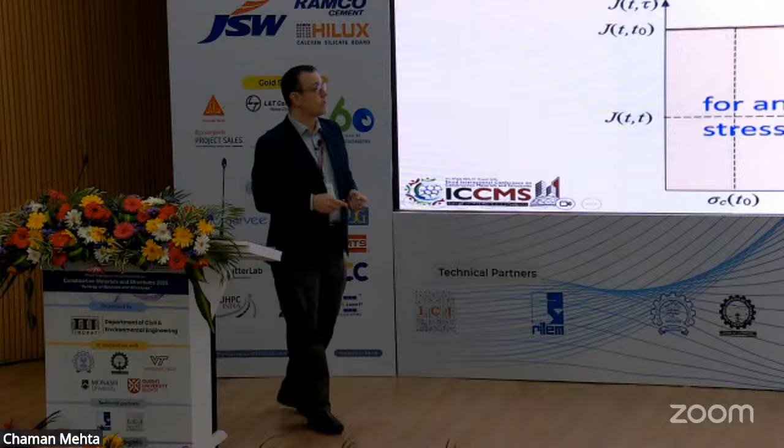So then the question we will ask ourselves is: is this actually the right way to do it? Is this the right approach we should use all the time? I'm not here to say it's not, because a simplified good model is always wonderful. But there are some scenarios I'm going to talk through in a second. I would say it becomes important to push serviceability further in those scenarios where serviceability criteria are actually those governing the geometry of the members.

There is a lot happening at the moment in this space, especially with new concretes, and also when environmental conditions play a role. I just thought to highlight this IABSE publication. We're focusing on the time-dependent behavior of composite structures. The idea here was really to bring it from materials to applications. We've got some case studies on real bridges and real building applications.

And one issue which I would like to flag, going back to what we were saying earlier, was that we had a lot of problems, for example, in getting the calculations for the building, the calculations on the serviceability, not because the companies were concerned about sharing technical information, but because the developers, so we're talking about who was driving the investment, didn't want to have any numbers on the market, in the public domain, because they were scared it would affect the real estate value. So there is actually a chain which goes beyond the technical justifications. And of course, there are legal implications if you start to write out results and measurements.

So now, going back, I'm going to try to skim through a few scenarios. I'm going to try to be as fluent as possible. I hope you will enjoy. Personally, I love this test. For me it's a pleasure, but not everybody, I would say, shares the same fun for some tests.

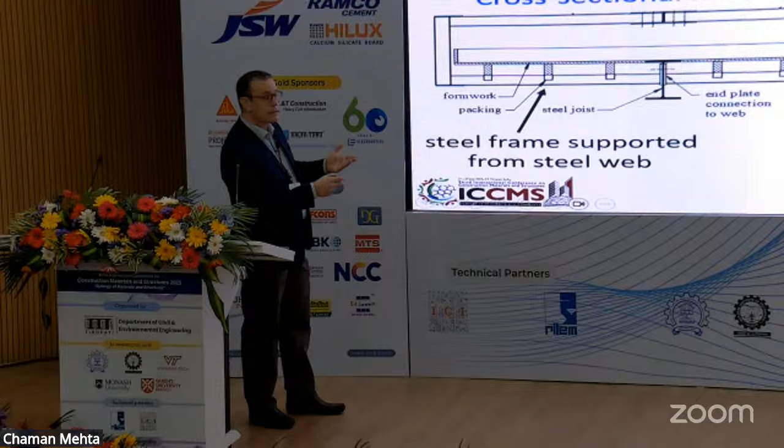So in this case, for example, we set up this simple frame system to create a scenario where we cast and prop. This frame is attached to the web. We put the formwork on top of it, we cast it, and then we remove the props. We did simple things, I would say it's common sense. Sometimes good structural engineering is about common sense. To load and unload them, we just release some shims, and it worked perfectly well.

Another thing that we did, because I think it's needed when you start to do setups, is that you need a constant load when you want to look at creep, for example. Usually, if you've done tests on creep rigs, you know that the typical creep rig has a pump. You have to go there every so often, especially every 6 hours, 12 hours even. And the idea was, do we need to do that? Can we switch it to something that is actually person-free? Why do you have to have someone always slave to the test?

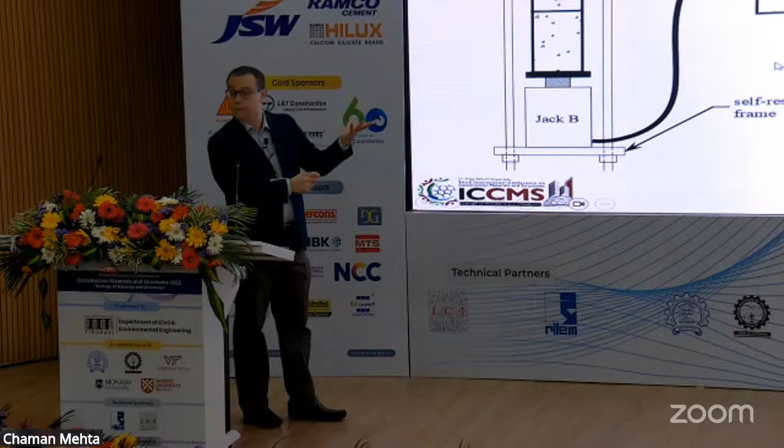And so we spent some time. I would say for me this was one of the hardest test rigs I've done, because we spent a lot of time changing the jacks. Basically, we put a sustained load, like a self-weight piece of steel or piece of concrete, against a smaller jack, a small ram, which builds up a pressure, and then apply the pressure through a larger jack, so they can keep it loaded. We tried different sleeves, and then we got to a system where once you push up the weight, it stays on for 3-4 months. So it's brilliant, it's very comfortable. And we applied that to different scenarios.

In this case, for example, it was the test rig that we did for push-out tests in the long term. I just want to show you that when you do advanced modeling, you have to push the experimental part as well, because otherwise it becomes a numerical exercise. And this is the interesting point, in the sense that these results are already post-processed. So in this case, you've got the 3 beams we saw before. In this beam, we got only the shrinkage effect. In these 2 cases, we got only the creep effect. So it's been already manipulated.

What I want to highlight here is that the continuous line is assuming a linear elastic shear connection. So it's just a spring, the interface between concrete and steel. And the dashed line is time dependent. So we got a sort of creeping of the shear connection, which has to do with the 3-dimensional behavior of the concrete near the shear connector. As you can see, shrinkage and creep have opposite effects. So without trying to visualize more with a more refined model, you will never be able to distinguish that creep is overestimating, going above the elastic response, and when you look at shrinkage, it's going below. Because usually you look at the results always together.

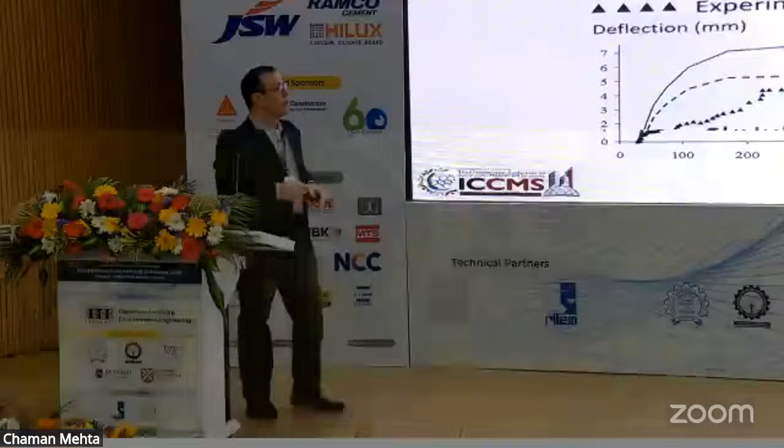In this sense, we were able to develop the equation. And I would say you will not be able to get this kind of insight without doing the suitable tests and having the models suitable for that. This will apply to any connection; nowadays you see a lot of buildings having very fancy connections where the shear connection is really working. Once you have the loading system set up, you can really do many, many things. Then I would just like to move on to some models.

So we actually pushed line elements mostly. And the reason is that sometimes to set up these three-dimensional shell and solid elements is quite complicated. It's very hard to check and it's very hard to post-process them. So we actually spent a lot of time and fun, I would say, in developing line elements. And we really played a lot.

And we look at, for example, cases where you have composite beams with shear connection, or even allow deformability like you will have in thin-walled structures. And this is, for example, some work that we did from generalized beam theory. It is originally from Germany in terms of the origin of this theory, but it actually became very powerful.

Just to show you the effect of it, if you have a box girder like this, and you just model it linear elastically, just to give an idea, you can see you can capture it. These are comparison displacements between the line element that we produce and a very refined Abaqus shell element model. You see, actually, they perfectly match. Of course, the deformations are exaggerated here just to show them, and the same thing applies to stresses. So there is a lot of power that we have available, and we really need to use it in the right context, I would say.

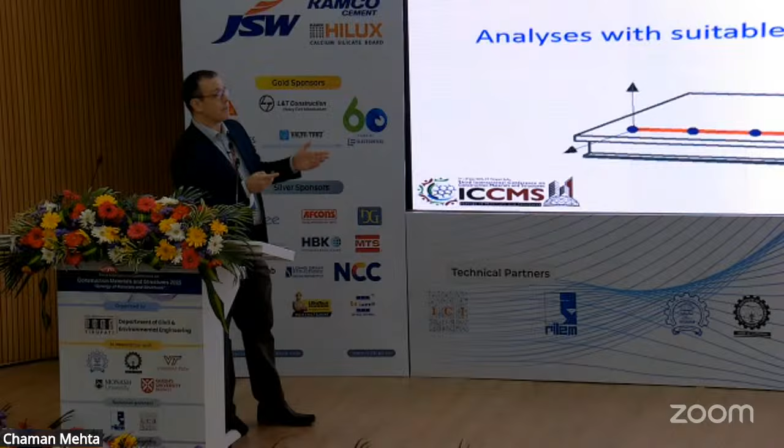So this is, for example, to look at shear lag effects. Shear lag is basically the behavior you have in a typical flanged beam, but it can be a wall or other systems, where you have higher stress concentrations near the shear connections, or where you have loading coming through thin elements. And usually in design, we just use effective width. If you want to create elements for very good, very quick design check calculations, you can start to refine your models to account for the shear deformability of the slabs, or combine them with whatever deformability you want to pick up also in the steel elements.

And you can then, for example, with bridges like these, run very simple checks by just using line elements as a user. Now, these line elements, of course, are not just the typical line elements, they're enriched. But from a user's point of view, it's very easy to implement. In this case, we're matching, comparing, the shell element model and the line elements, and you see the results match very well. I don't want to spend time showing you every single graph, it's really the concept here that I'm trying to get across.

In this case, before was displacement, these are stresses. Stresses especially are quite hard to get. And again, you have a variation here of stresses in different locations, so in different stages of the deck. Again, when you have complex geometry, we can also set up models to manage that. And again, following the same process, you can really capture those behaviors.

Now, this becomes important because, for example, I had a conversation with design engineers who do design checks of bridges. And it is not always very clear what the implication of deformations on the bridge is, for example, when they're doing the final checks, they put, say, some trucks or heavy loads on the bridge. Sometimes they misinterpret the deformation because, for example, they ignore shear deformation. It's actually quite important in these bridges, and these models capture it very well. So they're very useful models.

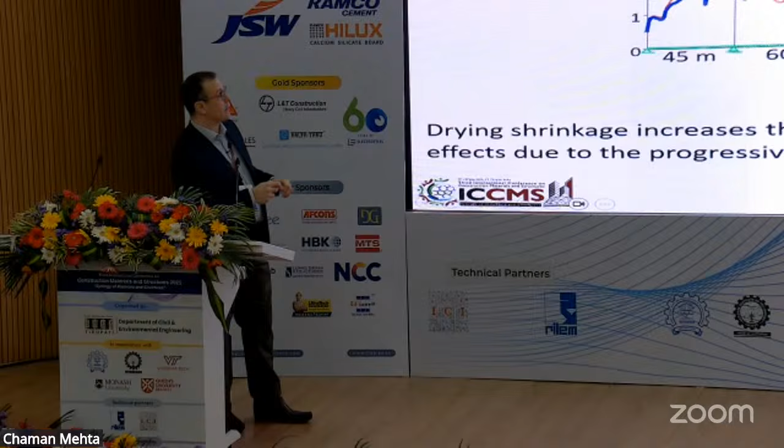And if you now look at, for example, the first week after casting or after 5 years, in this case we didn't include cracking, in the sense that what we are comparing, at least for this particular study, is really to have a sense of the implication from a design point of view. Once you start to introduce cracking, you have to be very careful how you manage the hypothesis. It can be done.

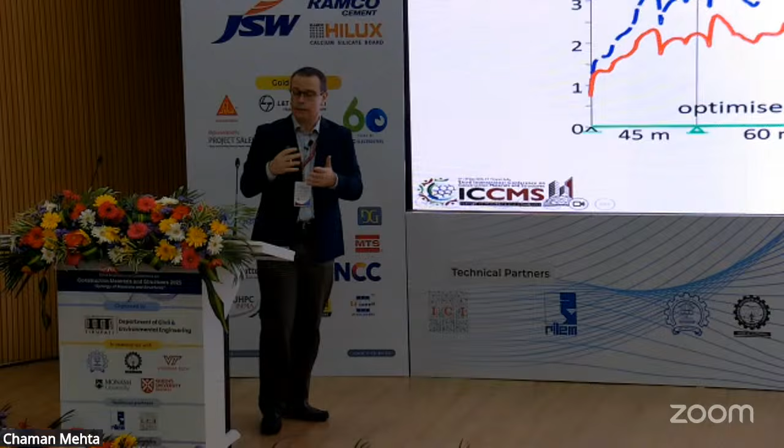It's not an issue. And this is, for example, the other issue in relation to the tensile creep behavior. If you increase the value for tensile creep, the stress in the concrete in tension will release quicker, and therefore you will actually have even less stress. So this is just to say it's worth using this, because what are the main advantages here?

The main advantages, and this is now for the bridge you saw before, is that you're pushing the peak stresses on the concrete near the second moment regions, which is fine from a modeling point of view. And you're getting away from the stresses you would have in the bridge. So these are plots without traffic loads. These are just really looking at the shrinkage effects.

And again, you can see at the supports you have a big difference. If you look here, the red is the continuous cast, and the support is really where the issue is. At the midspan there is a small difference, but keep in mind there is a lot of variability also in the concrete properties.

So the idea is, if you want to push down this path, I would say there is a lack of space in the software domain, in the sense that software houses are not always very keen to push these kinds of models, also because they're very hard for them to post-process, to manage, to maintain.

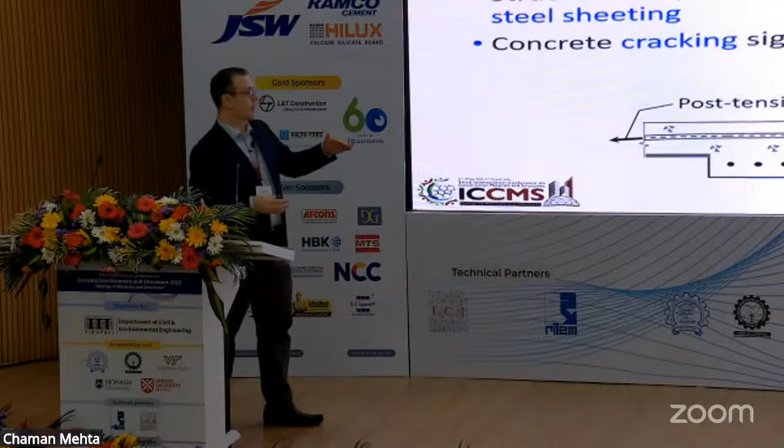Now, I would like to move to another scenario, and this is a very common floor system in Australia. If you've been to Australia, any car park is always a post-tension floor. Most tall buildings in a city like Sydney have post-tension floors, composite floors. And in the last 10 to 15 years there has been a trend to replace timber formwork with steel sheeting and just leave it there, to speed up construction.

And we've been involved in a project where we've been asked by a number of companies to look at this and say, can we take advantage of the composite steel sheeting? When we start a project like this, we usually start with some tests that demonstrate to us what is happening. So we had a lot of samples of this type where we tested simply supported post-tension slabs, and we did some unreinforced concrete measurements to measure the shrinkage behavior.

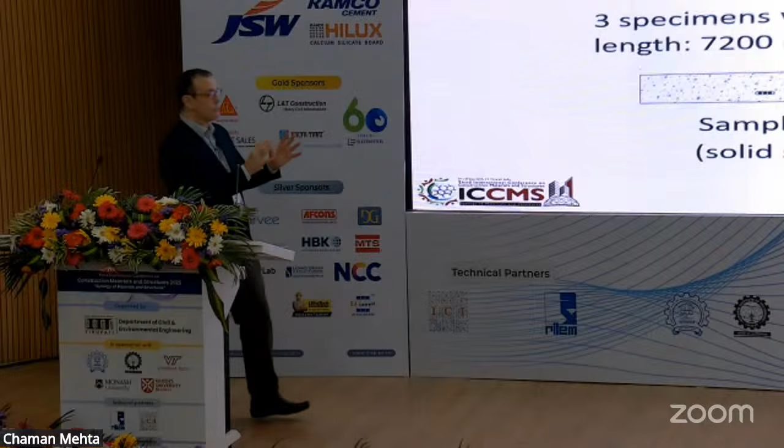So I'm just going to show you some selected test results to make you see through the issue. Let's say you've got a simply supported slab. Simply supported is a gift of a test, because it doesn't have the complexity of the continuity that you have in reality, but at least you can isolate things. And we had 3 identical samples. The only difference was we put the sheeting on 2 samples.

As always, I like to show samples before casting, because there is a lot of work in the preparation of the samples, and we never actually share it. Once you cast it, it disappears. In terms of details, we resembled the true detail of the steel deck on site. We stopped the sheeting before the support so that there was no friction between the sheeting and the concrete. And this is the information for the setup.

So these are usually the aspect which is interesting: at least the trend is to really apply the pre-stressing 25% in the first day or first couple of days, and then the remaining 75% after a few days. Now, if I can ask you to look at these results here. Here you've got the 3 samples, the 3 sections before. So you've got 3 samples, simply supported. These are the results for the concrete one, the first one, which is exposed top and bottom.

Now, can I just ask you, if you imagine you've got these other 2 samples here, if I have to plot them on top of this curve, how far would you measure them from here? And these are the results. So you see, here is the solid slab at the bottom, and here are the composite slabs. Keep in mind, the only difference is the sheeting. And here we are talking about 20 millimeter deflection already after a few months, 7 months.

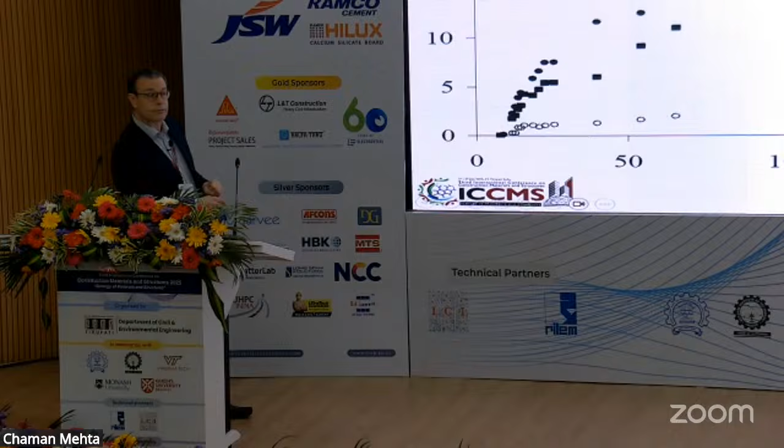What we did here, we also isolated and tried to predict these behaviors by putting different surface conditions on the unreinforced concrete samples, keeping them there over time. It has to do with actual drying conditions, when you dry from the top and bottom, or if you dry from just one side. If you dry from top and bottom, you have a shrinkage profile of this kind. In reality, you can approximate it for design purposes as a linear, constant deformation, which reflects the total deformations you will have in a sample if you look at the monitoring.

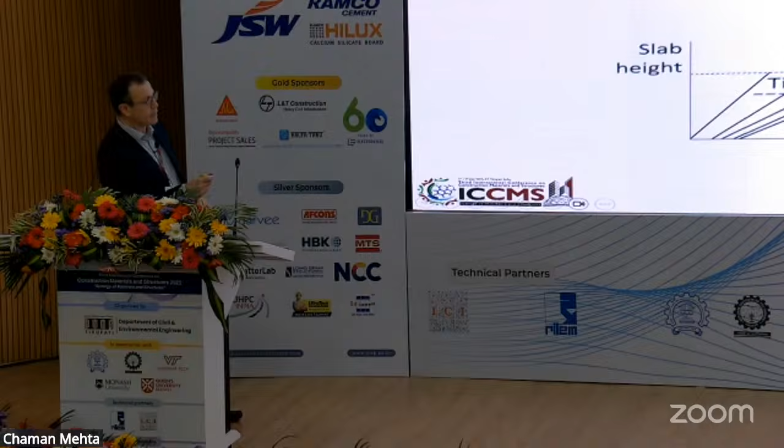And when you have the sheeting at the bottom, so it's sealed, when you do this test you just put some plastic to seal it. You create this kind of different gradient, which is the cause of that additional deflection that you saw before. So in reality, we confirm that what you do in reinforced concrete design is fine, but when you go into composite slabs, you need to move really to a shrinkage gradient.

We also applied some other samples where, in one particular one, we put curing compound, which is a sort of liquid that you put on top of the slab to stop it evaporating. You can see here some plots of the test setups, some during preparation. You can see the curing compound on the top will actually reduce the deflection, so it's sort of helping. But again, curing compounds, if you look at the data sheets, are really only viable for a maximum of a month or a couple of months, so you wouldn't want to specify this in design. Also how you apply them is very variable, so it's not something you can really specify from a structural viewpoint. But it has an effect.

Again, in this case, if you apply the uniform shrinkage that you would usually do if you were not thinking of the shrinkage gradient, you will be completely underestimating the deflection. You will be quite a long way out. And you saw in the test before, we just had the solid slab. As a final remark on this domain, if you look now at composite slabs, simply supported and continuous, we have the same profile. All we change now is the drying condition, the surface condition on the top.

I'm going to show you the results now for one sample, which is a composite slab with the steel sheeting at the bottom, sealed on the sides, and another sample sealed everywhere on the top. So if you look at these results here, we're looking at this simply supported beam, 3-meter span, which is typical for this kind of dimensions. If you sealed it at the end of the day of casting, this is where you go. Why do we do that? Because we want to eliminate all the drying effect. You can really kill time effects a lot if you limit your drying effects. If you keep it exposed on the top, you build up all this deflection here, and again, it's due to the gradient you saw before.

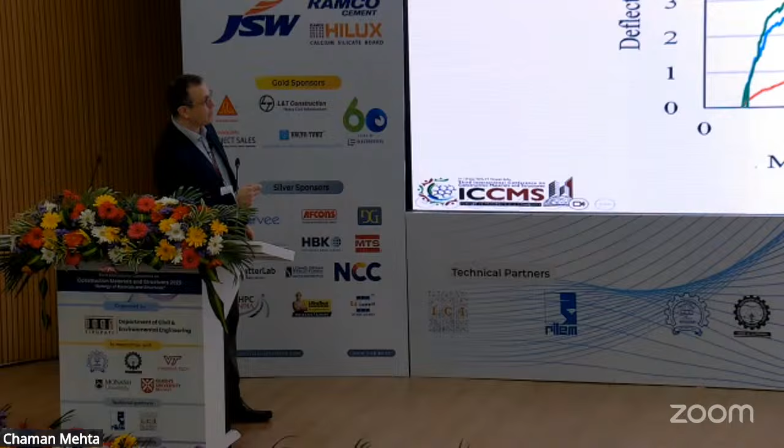This sample here that stopped here, we actually kept it exposed up to 37 days, and then we seal it, representing what you will have really in a construction site where you have your casting, and then eventually you go do your furbishing of the building. So can I ask you again to imagine, what would you expect? You got it exposed up to here, and after this point here, you seal it. So after this point on, it's sealed.

So where do you go? Will you go higher here? Where would you expect it to go? It actually reduced the deflection. So it's something which was actually quite interesting.

And I'm not going to go through the details here, but this is related to the humidity profile through the concrete thickness. It's a very difficult measurement to do, I would say, humidity measurement. So it's an approximated one. But what we could see here is that once you seal it, it will change the humidity profile, which is what drives time effects. And that was the reason why it was coming down.

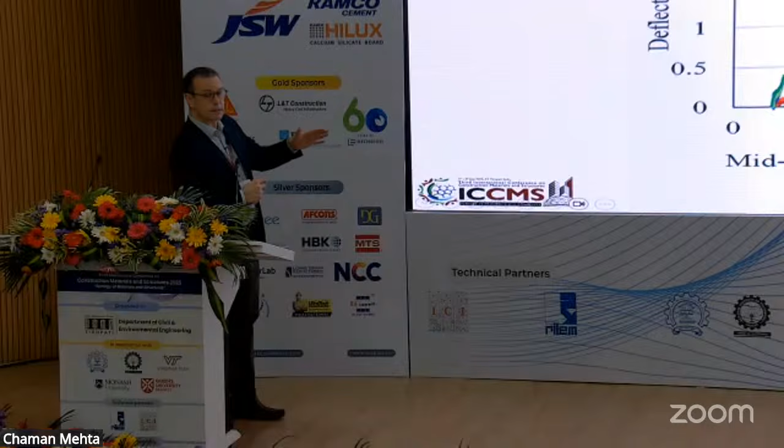We had a similar thing with the continuous samples. And again, these are sealed, the red ones. You got two lines because we got two spans now, it's continuous. In this case, you got the two spans, red sealed, green exposed on the top for the entire period. And the blue one is because you seal it after 37 days. The difference is due to cracking already occurred a little bit, and therefore the two spans are moving in slightly different ways.

So I think then the question is, we got these behaviors here, how do you account for them in design? We got them already incorporated in the Australian composite code. And my suggestion will be, push it to more advanced analysis. I think this is really the way to go to push future designs, not just from a serviceability point of view for time effects, but also for durability, because the features you need to calibrate for the time effects are also those driving the durability issues.

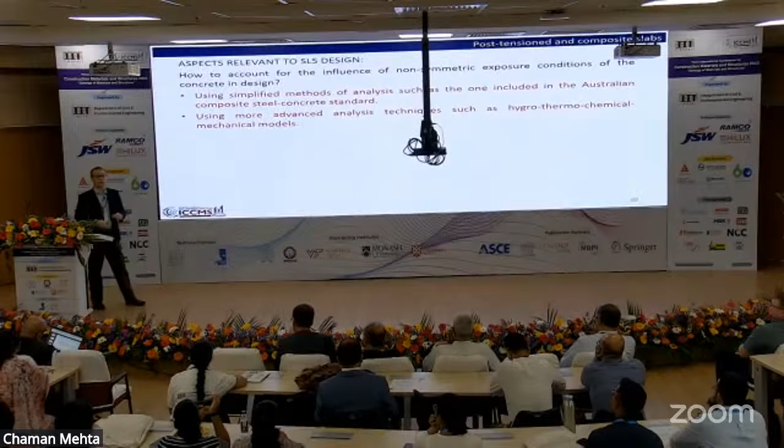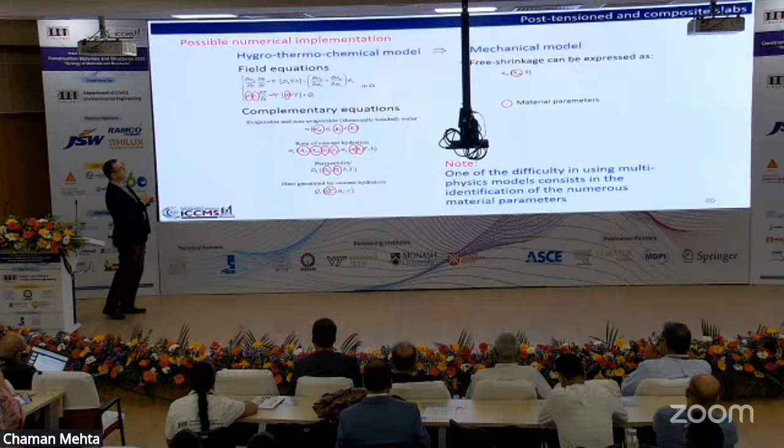And this is when you want to push it, say, for example, here in more complicated models, I call them multi-physics models. What I've done here is one way to approach this. It's quite a simple model out of those that you can develop in this space. And what is the issue here? The issue is that I circled all the parameters you need to identify, material parameters. So the idea here is that we've done some work where we're trying to optimize the tests that you need to do in order to identify the parameters.

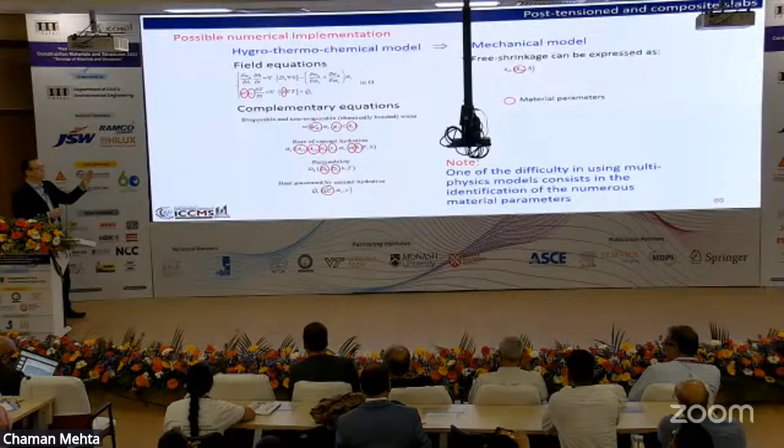Because when you got so many parameters, you actually have different sets of parameters that will give you the right solution, or the solution you measure. So I would say the challenge is really there. And it's just to show you how, with this sort of multi-physics model, we were able to identify the parameters just for the concrete mix, and then we're able to capture quite well the response. So I would say this is where I would love future trends in our standards to go, to move over to multi-physics heavily. And again, similar trend. And these are not numbers that we fudge. That's what's beautiful. They're parameters we identify through a particular process.

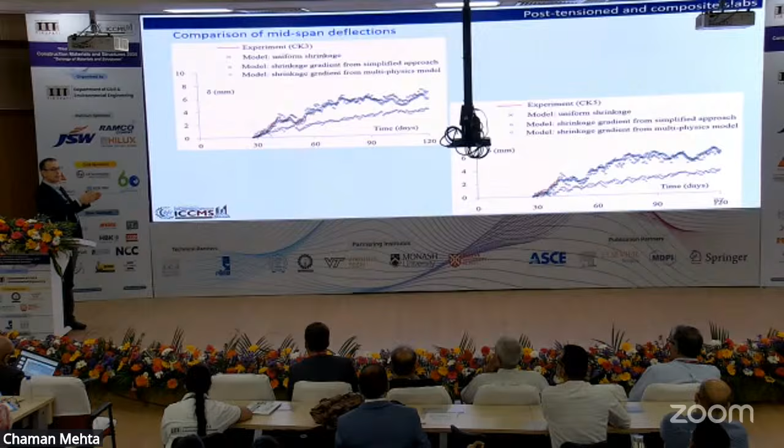Now, just a final remark, so we close very quickly: what is worth going to advanced modeling for? Well, you can do it for fun, but I don't think it's very useful if you're talking to industry. I would say when serviceability state is governing the design, that's fantastic. And also when you want to extend the design life of a structure. There are a lot of examples now where buildings have been maybe only partly demolished and then retrofitted and extended for another 50, 100 years. Now the design life is 100 years. So it's quite useful in this space.

I think one thing in engineering, which we were talking about earlier with Professor Novak, is that we need to have more information also on the buildings, how they behave.

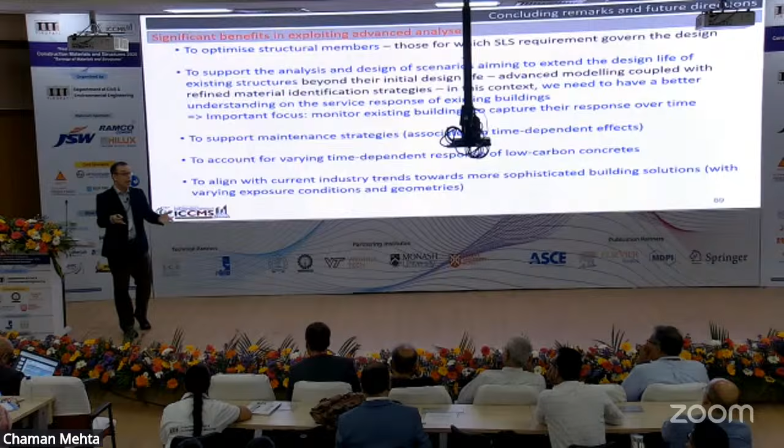I mean, we are quite different from the industry where, if you buy a car, you buy because it's beautiful, and also because of the technical specs of the car. In buildings, usually you tend to only go for the view. You tend to go for, where is it? How big is it? How it can show off. You don't actually go with the specs of the building. That's where I think we have to educate also the customers, as you will have in a cuisine, in a restaurant. It's that level, I think, of evolution that we really need to expand.

And of course, if you push these kinds of models, you can use them for maintenance because now you get time effects, but also durability. And I think low carbon concrete has a lot of issues with time effects. So actually, these models will allow you to really push them, because variation in temperature and humidity have a big effect. And I would say there is also a trend in industry where they're going into very, very fancy solutions. So I would like to recognize that a lot of funding came from the Australian Research Council and also colleagues, who have been funding us to play through these models.

Thank you very much for your time. So thank you very much, Gianluca, for your huge presentation, a lot of information, a lot of content. We have around 5 minutes for questions. Please.

Good morning. I am Theta Rasmi from IIT Madras. Your work discusses approximation for the aging viscoelastic behavior. How is it sensitive to different creep parameters and the shrinkage strain parameter? Because in the numerical approximation, they assume the time derivative of stress is neglected or is assumed to be constant within a discrete time interval. But in reality, concrete follows the ACI or FIB code provisions. They don't follow the Prony series model. So how is this method sensitive when we deal with that?

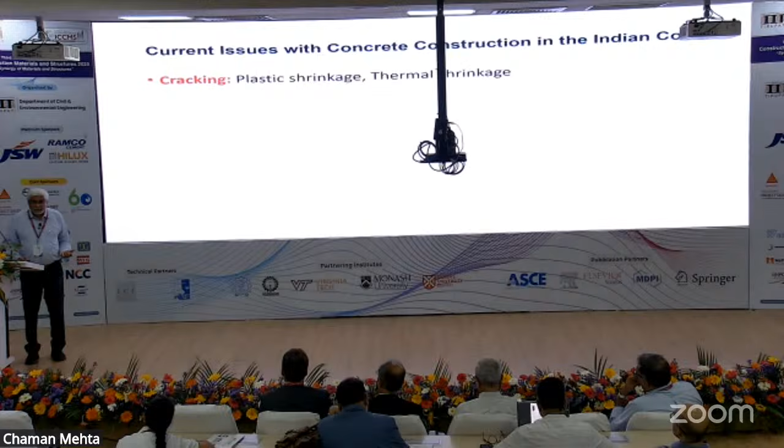Having said that, there are a lot of issues related to materials, related to new technologies that I'd like to touch upon. Cracking is a big problem. Everyone you talk to at sites would say that cracking is always occurring. It could be because of plastic shrinkage, thermal shrinkage, which often we don't know how to handle from the structural design point of view, or sometimes even from the construction point of view. Testing, where to test. Some people say, who is going to test, the RMC plant or the site? And sometimes it falls between cracks. What age we should test, what frequency. Durability is and will be a big problem.

We have corrosion happening. You will hear from my colleague Radhakrishna Pillai tomorrow. Leakages everywhere. There are buildings where having a bucket is very, very common in your office or bedroom because you don't know how to take care of the leakage.

Then sustainability is something that we have to take care of. We are building like mad. We are using up raw material like crazy. And we are making mountains into ditches because we are taking away all the aggregates. So carbon footprint, raw material consumption is very, very important. And a big problem for a country like ours is water.

See, when we teach about concrete, all of you who have studied concrete will remember that we say good quality water should be used for concrete, potable water should be used for concrete. But this is the water that you're taking away from people. So this is the paradox. People need houses, need bridges, but they need drinking water. Now, who has to sacrifice the water? Places like India are suffering, other parts of the world also.

We're running out of water. There are disputes going to be there for water. Wars may be fought for water. But we are insisting that good quality water should be used in concrete. We should start looking for alternatives, and we are looking at treated sewage water. Let us mine sewage water for concrete. Let us not use drinking water. Let us think of how we can extract water that is not drinkable and use it for concrete.

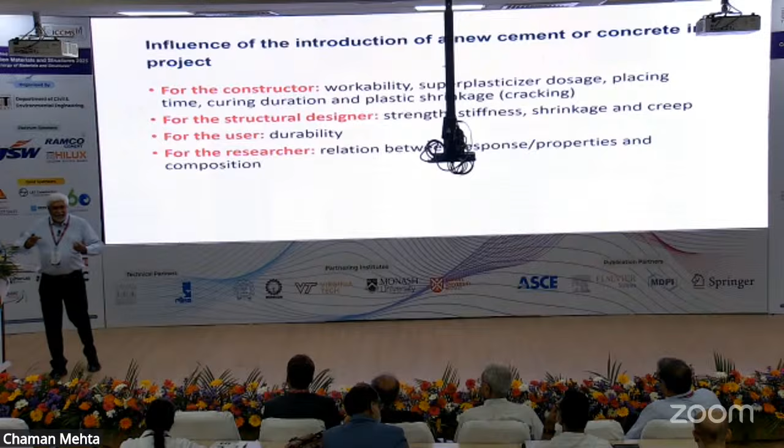But for the user, does the user care whether you use the right amount of steel or you use M40 concrete or M30 concrete or not? The structure has to be durable for the user. I am living in some place, I want it to last as long as I want. Now the researcher comes in and has to do something. We have to make a living. So you try to connect all these things and come up with formulas and a lot of power equations and all that stuff to get this done.

For the administration, suppose they want a new city or a bridge, they want service life. This depends on many of these other things from the beginning. You construct badly, you don't cure well, and your life suffers. So these are different things, and obviously the planet suffers if you don't do a good job. Your carbon footprint is gone. So what is unique about concrete, which is not there for any other material, is you have multiple stakeholders and anyone can stop you from implementing a new material, or be it structural or whatever.

So this is the big challenge, and we have to try to understand all this. At IIT Madras, when we take a new material, like this new type of cement called LC3, which we've worked on for about 10, 12 years, it has now recently been standardized. We will see it in the market soon.

So we said we'll have to look at all these aspects. Otherwise, just doing a bit doesn't mean that you're going to help this concrete be implemented. Okay? We have to make sure that the contractor, the constructor, is comfortable with this concrete, not scared off because the superplasticizer demand goes up and plastic shrinkage happens, then they will just refuse to use such a concrete. The structural engineer needs also parameters and so on. So all these things are important.

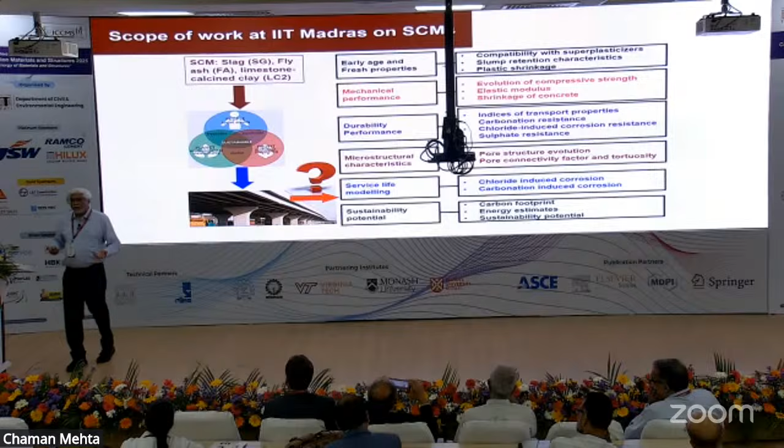And also what we realize when we implement new technology is that all of it is not wonderful. But researchers will only talk about wonderful things, because you cannot write a paper saying that all these things are wrong with my technology. All the things I've done wrong are never seen in a paper. You always say wonderful things. Now, we know that fly ash concrete or any concrete which has very little clinker is good for chlorides, bad for carbonation. We play it down. We say that carbonation will hardly occur. But we have to talk about these things. We have to understand the pros and cons, or somebody else will find out the con and say that this is a bad technology. So this is very, very important that we do everything needed to take something into practice.

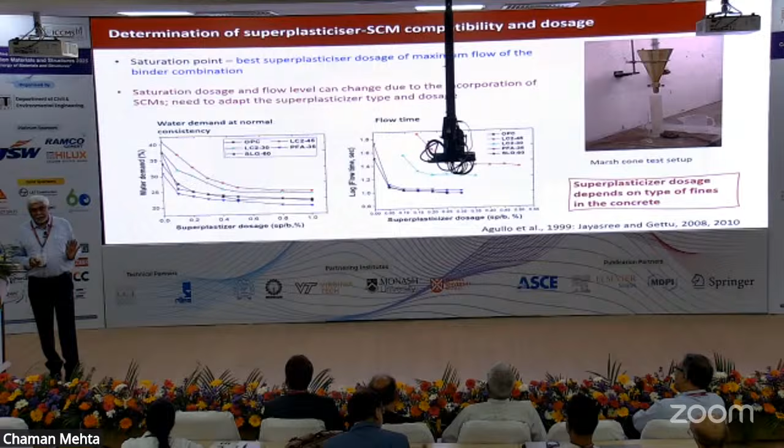Now, adding on to what Gianluca said about the 2 types of shrinkage, I'm going to give you 3 more, because we start a little bit earlier. Plastic shrinkage is very fresh concrete cracking. This in India is tremendous. We have huge problems. People will go for lunch and come back and the concrete is cracked. And who will they blame? The cement or the RMC? They forgot that they have to cure.

When is curing usually done? After 24 hours. And if you cast concrete on Saturday, when do you cure? Monday. Concrete doesn't know this. Concrete doesn't know that Sunday is a holiday. It happily cracks. In reality, you go to sites, large slabs are cracking, and then people say, you made us use fly ash. Yes, fly ash will crack, but you have to cure earlier. So I tell people, simple thing, push your thumb into the concrete. If it doesn't go in, start curing. No need for any sophisticated maturity meter. Just use your thumb, and it works.

Plastic shrinkage, autogenous shrinkage, Gianluca very nicely showed that this is going to become more and more important when you have higher grades of concrete. Similarly, thermal contraction. Diaphragm walls, very systematically, most diaphragm walls have a crack every 2.5, 3 meters. Professor Prasad, they come to him and say, cracking. He says, did you cure it? And they say, we will start doing it. So the first 3, we never studied about. When I was a student, we never studied about the first 3, because you had so much water in your concrete, it did not crack due to the first 3. Drying shrinkage was important. Now you're putting so little water, you're putting 0.3 water cement ratio, 0.25 water cement ratio. The first 3 are becoming important. Drying shrinkage and carbonation, maybe not.

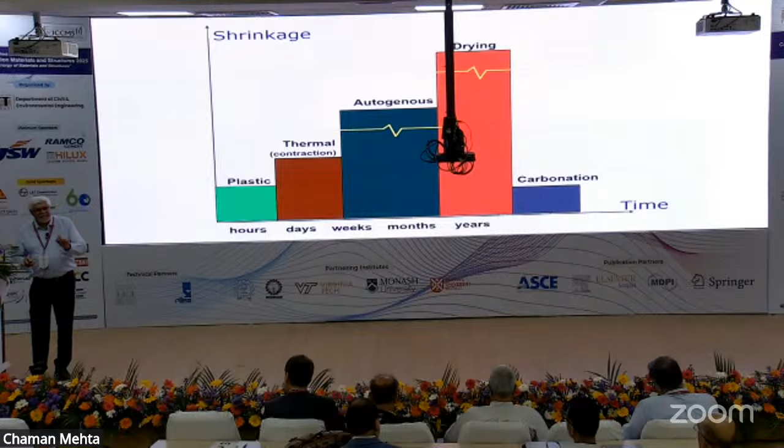One easy way that I tell students or even consultants to remember: when you see a crack, the first question you should ask is, when did you see the crack? There you get half your consultancy fee. If somebody says there's a crack, just ask when it happened. And most of the time, this resolves the issue. So this is very, very important, very simple. And if we can take care of this, a lot of problems will be resolved.

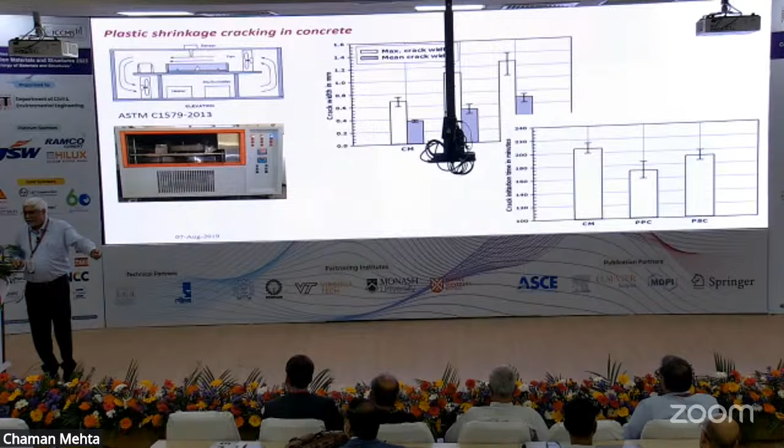Cracks are starting earlier. That means you have to cure fly ash concrete, slag concrete, LC3 concrete earlier and cure for longer. This is very, very important. We cannot relax and say that, okay, the concrete is taking care of itself. It will crack. Look at the numbers on your right, and you can see the increase in crack area. So we actually measured how much the crack area changes under these circumstances.

The fly ash content is 15-30%, GGBS is 15-30%. Crack increases a lot. The strength is the same, workability is the same. From the structural engineering point of view, it is the same concrete. But the material has changed and now it's going to crack. And this crack will stay forever in the structure.

Now, what do we do about it? I'm not saying throw away fly ash and GGBS. Simple thing: put 1 kilogram of polypropylene fibers into your concrete. Most of this cracking is resolved. Very simple cure, very little cost, very little effort. Nothing else changes. Can be done. So these are things we have to understand. And if you understand that, new technology can go in easier.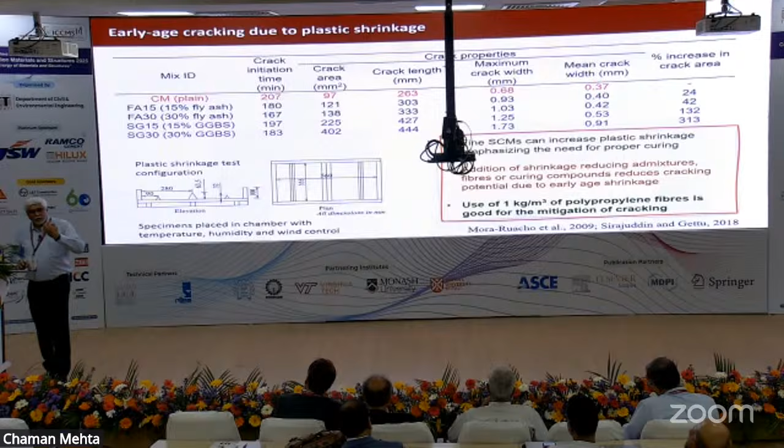3D printing is prone to severe plastic shrinkage cracking because you don't have aggregates. You have thin elements, very high surface area, very high cement content. On a hot day, a little bit of evaporation is going to give you a lot of cracking. Otherwise, the project is wonderful. But you can have cracks.

So what we finally have to do is maybe in 3D printing, just behind your nozzle, there has to be a mist sprayer. Just like your nozzle is moving, there has to be a spray just behind, which will keep the concrete wet. Otherwise, amazing technology will be thrown away. Your user will say, it's all cracked. I don't want a building like this. I don't want to live in a house like this, an office like this. But simple things can change, and we have to understand what happens.

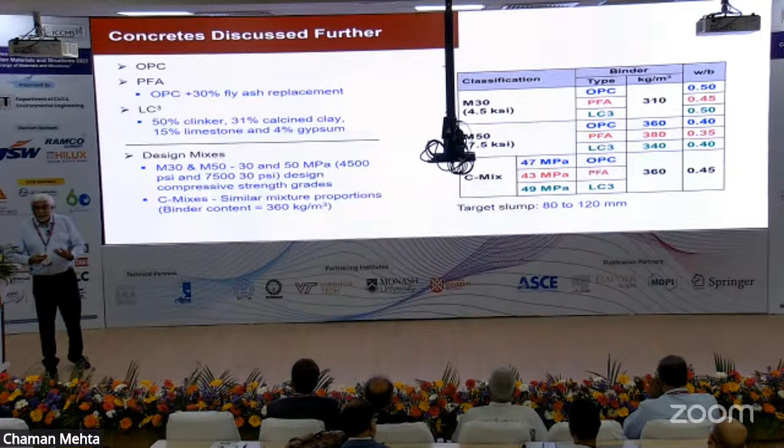So let me move on to structural concrete. And durability becomes very, very important. Strength becomes important. The structural engineer has to design. They need to know the Young's modulus and so on. So I'll give you examples of some of the concretes that we have tested. First of all, strength.

We should know that early age strength depends on the type of binder. The final strength may be the same. It may be M50, M40, but the early strength matters. Why does it matter? Because of deshuttering.

Precast concrete. Now, when you talk to precast prefabrication companies, they almost rule out fly ash concrete and slag concrete. Even though you can pitch sustainability, talk about carbon footprint. Why? Because they want very early age strength, which we hardly study. Doesn't come into our structural codes at all.

So what is the strength they want? Normally now in India, they are asking for 15 megapascal at 15 hours. Okay? It's practically impossible if you have 50% slag, 70% slag, 30% fly ash. This is now negating the use of special concrete, special binders, blended binders in concrete. So we have to work on that.

We have to see how to push up this strength and not worry only about the higher strength concrete. People looking for research ideas, we should look at early age strength, 1 day strength, 15 hours strength, 16 hours strength. That is where research should be put in. Then we have to look at Young's modulus, which is also important. So these are things we have to measure, not just use the code formula for finding out the Young's modulus, but we have to measure when we are looking at new types of concrete.

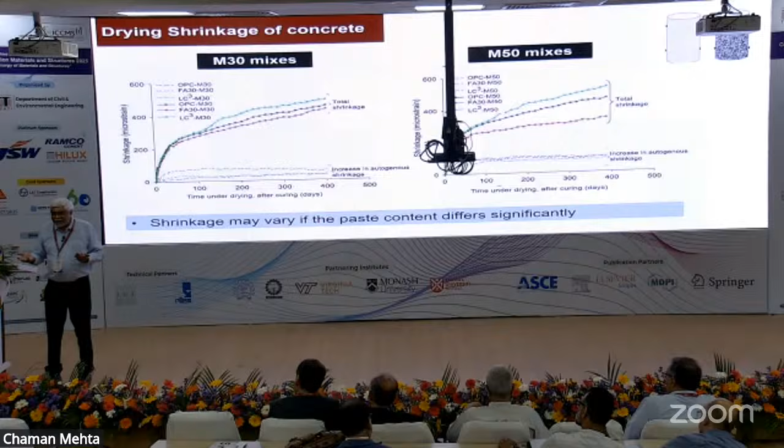Again, about prefabrication, one thing that Professor Prasad and I have seen is when you do prefabrication, you want to remove your element from the mold and take it to site and install. How early? Maybe 3 days. Or your calculations have been done for 28 days. So once the concrete slab is in place, what continues to happen? It continues to shrink. If your joint has been closed, your joint will crack. The joint will open. So these are simple things.

When you talk to a designer, they say, I've done it according to the code. But you have installed the element in 3 days, not at 28 days. Okay? So strength will pick up, but your shrinkage also will happen. So these are subtle things which dictate whether you can use a new material or not.

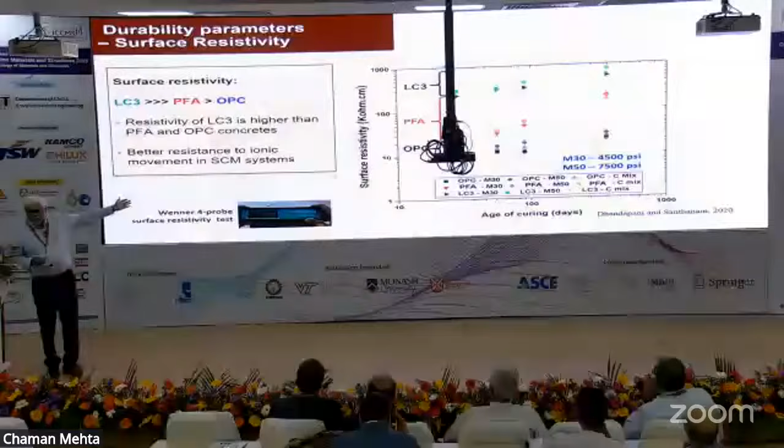Let's look at the benefits of some of these new concretes. Resistivity is on your y-axis, it's in the log scale. Resistivity, when it is higher, that means corrosion is slow, because corrosion is an electrochemical process. Radhakrishna will talk to you about it tomorrow. And we find that ordinary Portland cement is the worst. So if people believe that ordinary Portland cement is good for durability, it's not a good thing when you're talking about chloride.

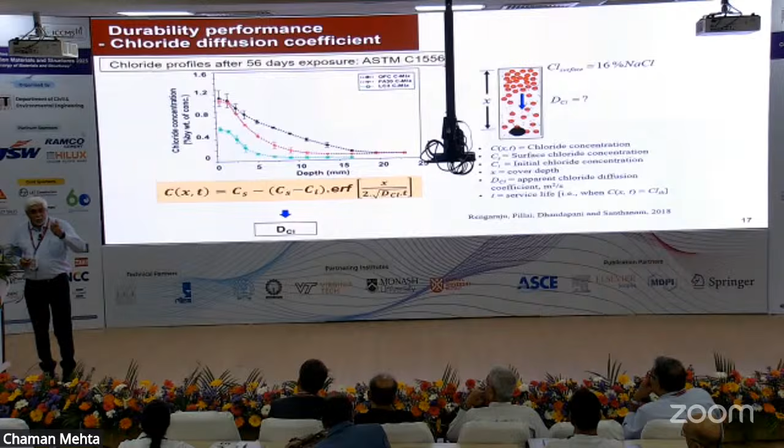Very clearly, I'll show you this and I'll show you diffusivity. So again, diffusivity. We took concrete, put it in salt solution, and what diffuses in is faster when you just have ordinary Portland cement. Fly ash, slag, and so on will slow this down. That means your cover is protecting the concrete better. So there are a lot of good things that we can take advantage of. Diffusion, the black bar is ordinary Portland cement. Concrete is allowing chlorides to go in much faster than the blended binders. Okay, so for durability under chloride attack, very clear you get longer life with blended binders.

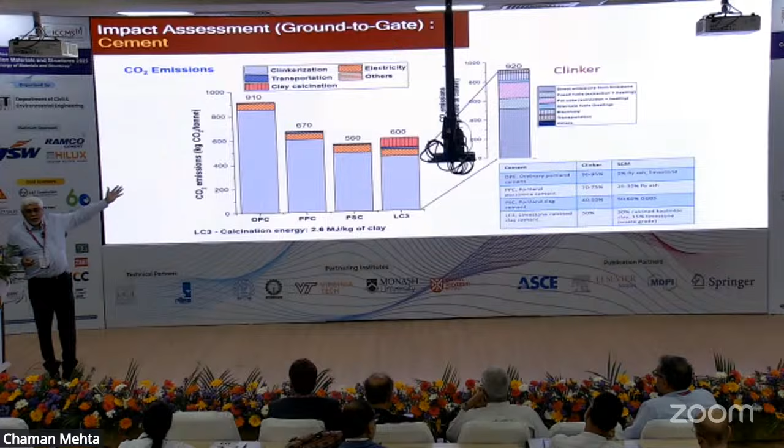Carbon footprint. We talk a lot about carbon footprint. There's hardly any data in India, Indian conditions. So we started going to cement companies, getting the data directly from plants, and you can see the benefit in Indian conditions of using blended cement. You bring it down from 900 kg of CO2 to about 500, 600 kg. So huge benefit. Without changing any other property. The cement complies with the standard, but it has a lower carbon footprint. Similarly with energy. Energy also comes down a lot.

Your cost comes down a lot. Raw material consumption comes down a lot. Same thing with concrete. So that data was put into making concrete, and we also find that the carbon footprint comes down. Higher grade concrete is more effective. Higher grade concrete means that your carbon footprint of the building will come down. You will use less material more efficiently, so that way it is better. So if I have a choice between M50 or M30, 50 megapascal concrete or 30, 50 would be better because you will use less material and therefore overall consumption will come down.

Now, the question is, we can talk about sustainability, but at the site, how do I choose a sustainable concrete? This is the question that people were asking us. All this is fine, you guys have done a lot of work, but how do I know at the site which concrete to use? So we said that we look at these aspects which we felt were important.

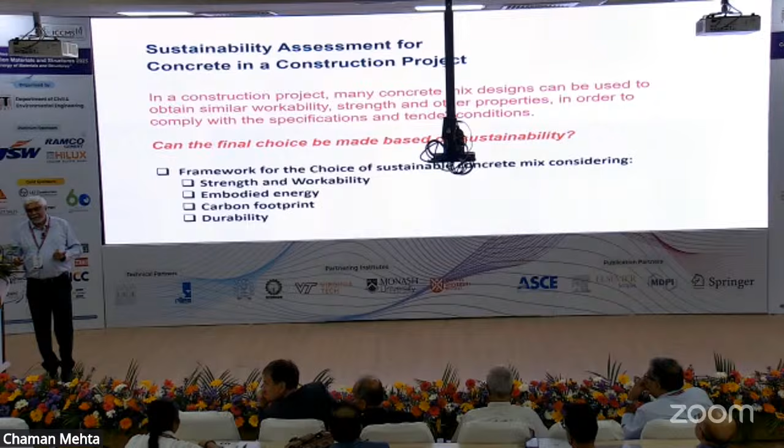Strength, because you cannot sacrifice stability and safety. Workability, because you need it at the site. Embodied energy, because it talks about raw material usage and cost. Carbon footprint and durability. So we put these together in two indices. The first one is called energy intensity. Energy intensity is energy consumed per cubic meter divided by the compressive strength.

The other one, what we call an apathy index. Apathy index is your carbon footprint divided by a service life parameter. So why do we call it apathy index? Because at the site, nobody cares about these two parameters. Nobody cares about carbon footprint. Nobody cares about durability. They want to finish the project. Defect liability period is 1 year and they want to get out. So we want to decrease this, obviously.

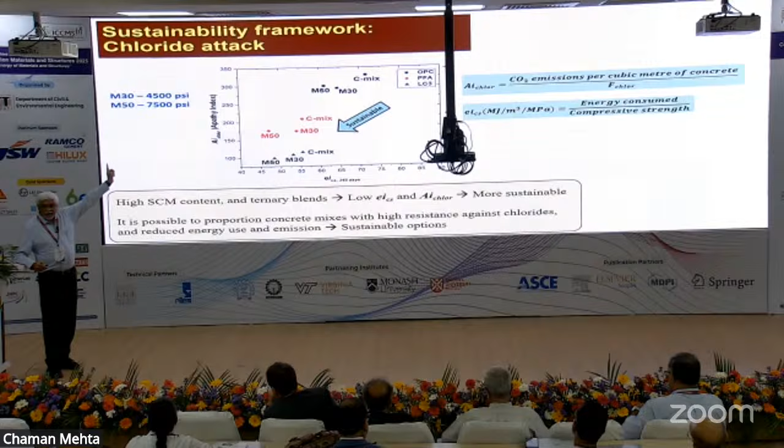Now, let us take as many as possible that you can do and do this plot. On the x-axis, I have energy intensity. I want to keep it very low. Apathy, I want to keep it very low. And when I compare, some of these concretes really turn out well. Of the concretes we've studied here, LC3 comes out well under chloride attack and so on. We can do this for more.

So we went and did 30 different concretes. And again, you can choose which ones are at the left corner and this comes out better. So this is easy to do. Not a lot of calculations, but go to a catalog and do this plot for your concrete at the site and you can choose what is sustainable. Now, this is not all talk. Actually, this was done. So this bridge in Kerala, again, Professor Radhakrishna Pillai might talk about it.

The middle span, we were allowed to change the mix. The outer spans were designed for M40 concrete. So we took the chart on the right that I talked about. The upper pink points and pink and orange points are the spans on the extreme, normal concrete that they were doing. Middle span, they allowed us to change the concrete. This is because my colleague Radhakrishna Pillai has an immense convincing power. He pains the hell out of people so that they agree to whatever he says. So they allowed him to change the span.

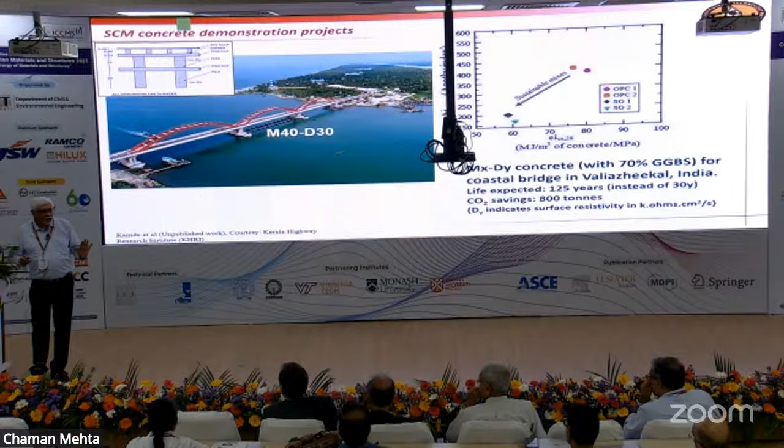Real bridge standing. And what could happen is they went for 70% GGBS, same strength, same workability. Life expectancy for corrosion to initiate went up from 30 to 125 years. Carbon footprint saved just in one span, 800 tons of CO2. So it can happen. But what is very important is to get to this point. Not just stay in the lab or on a sheet of paper and say, I have saved the world. You have to show and you have to convince people.

So to conclude, I would say that if we are talking about sustainability, if we want to make a major change in sustainable construction, these are some of the things we have to work on. There is no other option. We have to look at low carbon cements, better construction, better durability, and so on. So with that, I'll stop. Thank you very much.

Ravindra, thank you very much for the very nice talk. And you have made, I would say, several very impressive statements. And curing is one of the most important actions after casting the concrete. And what I also would like to say is you are burning for your profession. And this is perfect. I like it. Thank you.

So now we have 4 minutes for discussion.

Good morning, sir. Morning. Very interesting and implementable ideas that you have given.

Thank you. Just a question on that surface resistivity test. How effective is it, sir, in terms of measuring durability? Because there are so many other tests on durability of concrete. Considering the ease of doing the test, I think it's very effective. We have done a lot of correlations between surface resistivity and diffusion. It works very well. Now I think it's come to a point that we can implement it at site also very easily.

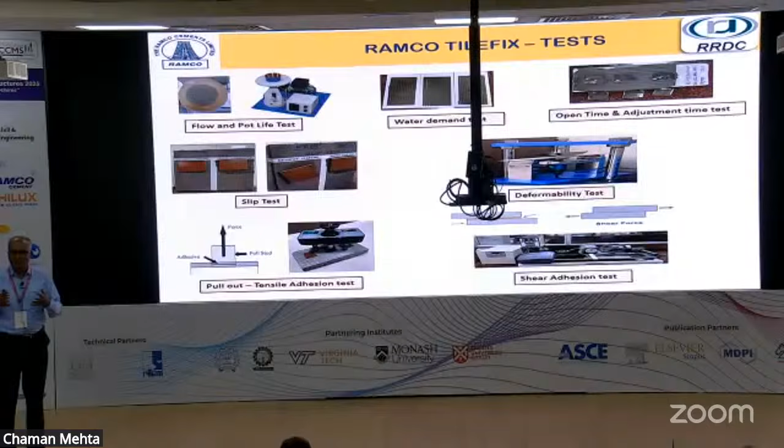The slip test, of course. As compared to cement mortar, it is always advisable to go in for tile fix because of the inherent disadvantages of cement mortar: it shrinks, and you cannot do curing. But as far as this tile fix is concerned, it is a self-curing product itself. So tile grout, of course, we have this, and it has been a kind of problem for many of the users as far as the grout is concerned. So we have developed an epoxy tile grout so that it fills the gap between the tiles and gives a much more effective result, and it is also chemically resistant. Wherever acids or chemical products are being used, you can go for epoxy tile grouts.

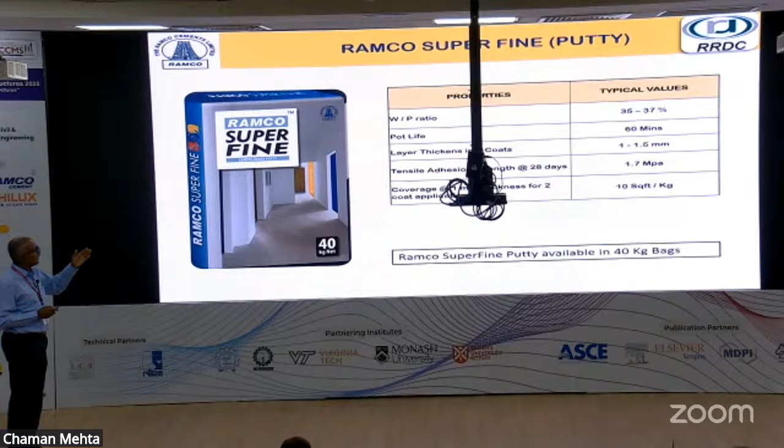These are the kind of tests that we do: water absorption, degree of whiteness, consistency, chemical resistance test, again tensile adhesion strength, because by the nature of the product itself, you need to look at that. Superfine putty, again a common product that is available in the market, and we have had this for a number of years. So tensile adhesion strength is one test that we do for this. Setting time, pull-out strength. You will see that pull-out strength is a common test for most of the products, because being a thin membrane, you have to do that pull-out strength test for most of these products. So we have that. The spectrophotometer test is one test which tests the degree of whiteness of the putty itself.

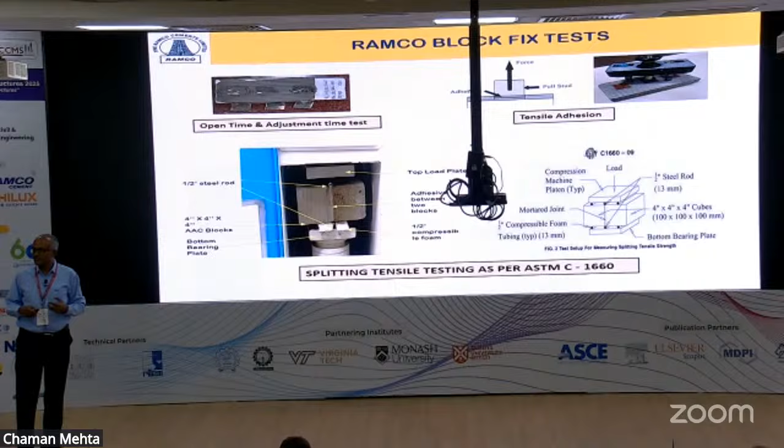So that is block fix. Of course, the critical test that we do on that is the split tensile strength, where it fails when you have that paste and when you use it, at what load it fails. So that is the split tensile strength that we do for the block fix, and the tensile adhesion strength again. Super shield, of course, is the integral waterproofing compound which is added to concrete.

The basic purpose is to reduce the water cement ratio. It is basically used in the retail segment where they are not able to reduce the water cement ratio by using the conventional methods. So it is effective in reducing the water cement ratio to such an extent that your workability is not compromised and you get a higher strength, and thereby the durability is also enhanced. So these are the kind of tests that we do. The water permeability test is one test that we do as far as the integral waterproofing compound is concerned.

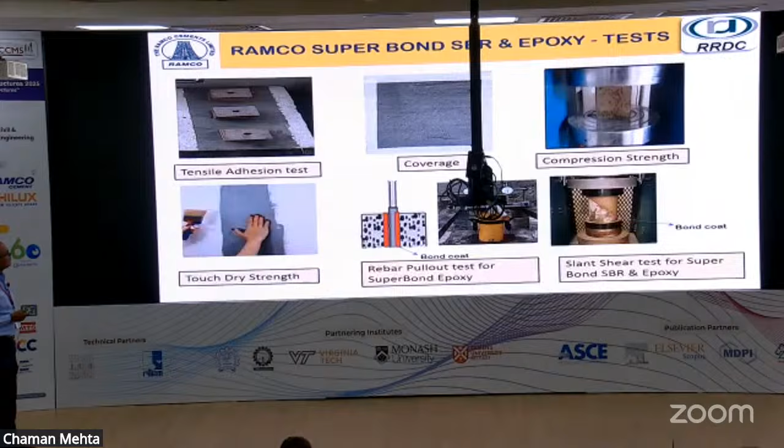Then the super bond and epoxy, both, of course. The primary objective of using this is bonding old concrete with new concrete, but SBR is also being used as a repair mortar, as a mix of that. So for such applications also it is being used. So the kind of tests that we do for that: elasticity, pull-out strength, again, for the epoxy bonding agent, tensile adhesion strength, compression strength, rebar pull-out test, slant shear test. So these are the kind of tests that we do for SBR and epoxy.

Again, of course, we had compared with various products available in the market. That's how we try to see how we can make the USP in our product. So we have done a detailed study at our research center, the Ramco Research Development Center, which is at Chennai, and we have done a lot of studies on cement, concrete, and various other construction products. So we have collected various samples from the market. We have done a comparative study, and we have seen which is the right kind of test, based on the feedback from consultants as well as from various experts in the market.

So we have been able to do that. This is the Aqua Shield test, that is, the brush kind of coating that we have done. Water penetration test we have done, elongation test again. Food grade test also we have obtained for that product, because that is most important, because many places use it for water tanks and other places. So these are the kind of products we have got.

Ramco micro concrete, of course, we have got in 3 variants: M40, M60, and M80. And these are the tests that we do on that: compression, flexure strength, and yield, flow, all these tests that we do. Super grout, of course, it is again a 25 kg bag, flexural strength and compressive strength.

And most of this product, you see, what we have done is that before bringing into the market, we have used it in our own cement plant. Be it our silos itself, waterproofing compound we have used. The primary objective was to use in-house. Over the last 3-4 years, we have been using it in our own cement plant, and then later we thought of why not commercially bring it out.

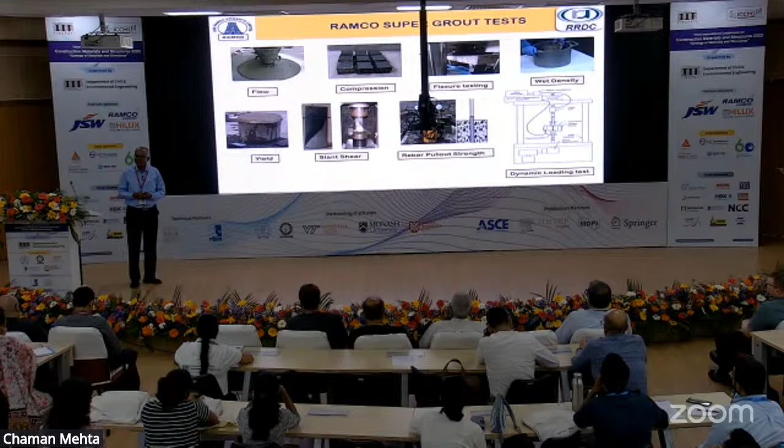Of course, dynamic loading test is one challenging test that is being done, but we have taken help from IIT Madras also for helping us do the kind of test on this, because that becomes critical in many of the applications. So we would be further developing the product based on the results that we get. This is the super plaster which I was talking about, the super plaster eco.

Primarily, if you look at the construction side, the same cement has been used for plastering. It's surprising to see that even OPC 53 is nowadays being used for mortar as well as plastering applications, even in a city like Bangalore, where we think that a lot of knowledge is there as far as the practical application is concerned. But there also, I was surprised to see, even 53 grade is being used for fixing tiles, which is quite surprising.

The answer to that is, many of them say that we have purchased some cement for concreting, so the balance cement has been there, so we think of using it for various other applications. But then the concept of right product for right application doesn't fit in there. So this is the water retentivity test we do, as well as the air content, which is of course very specific to plaster. When you measure water retentivity and air content, you will be able to understand whether the mortar is able to spread out easily, and whether it has self-curing properties or not. So we add some polymers for getting those self-curing properties.

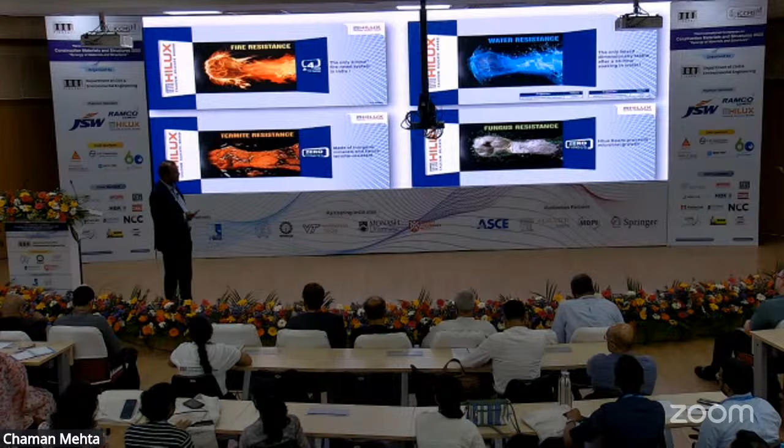And again, one more concern: will termite issues occur with this product? No, we say it is zero termite issues. And then the next, fungus. During dampness or any kind of water getting into this product, is there any fungus? This will never allow microbiological growth in the product.

And this is the best sound insulation, which we have tested across national laboratories. It gives around 42 to 65 dB levels and NRC of 0.7 to 0.85. And of course, when we use this product in buildings, we normally have impact issues. So it is the best product, giving you 900 J per square m. These are the products which we have come up with in the market.

And by keeping this, we do the partitions. We have our own design team, and we do designs according to the requirements, and we give presentations to the clients and show how we can fit our product into their requirements.

These are the false ceiling systems and 60-minute fire-rated false ceiling systems. Basically, we get the design drawings from the architect or consultants. We prepare ourselves with reference to the drawings from the consultants, and we also go along with the RCP, that is the reflected ceiling plan. We go along with the servicing lines, all MEP and other services. Of course, without that, we can't design our false ceilings. And then the structural encasings,

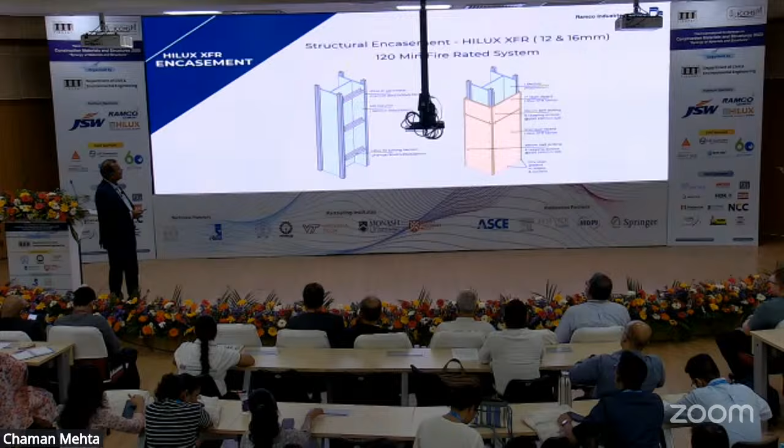120-minute fire-rated systems. And we also come up with a new product, which is a high-density fiber cement board, which can be used externally for buildings in terms of cladding and external wall partition also. It is basically a high-density, superior-strength exterior product, which is presently picking up in the market. As I said earlier, this product also has fire resistance, wind resistance, water resistance, low thermal conductivity, and sound resistance, and is eco-friendly.

Of course, we are also coming up with a product like Hilux XFR, highly fire-rated partition boards. These are the Hilux XFR applications. And one more product we are presently bringing to the market is the ultra-lightweight ceiling tile, a Hilux Light material. Again, it has different patterns. We are coming up with the design with NRC levels, and this also has fire resistance, sound insulation, and low thermal conductivity, and it's basically a lightweight product.

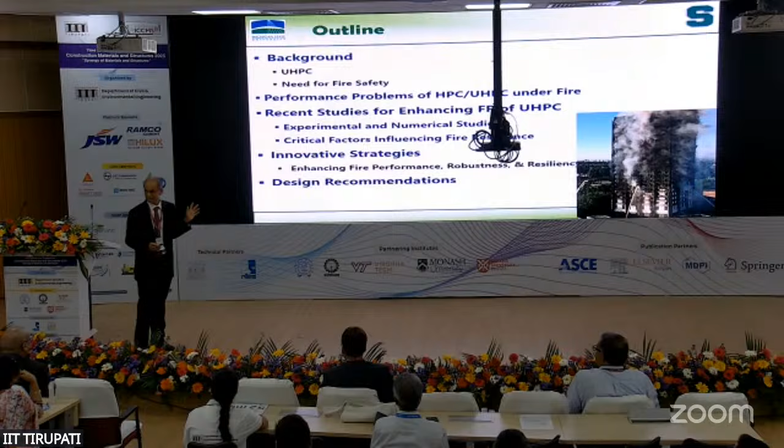Codes don't say that today. Hopefully tomorrow they will say that, right? And design recommendations. Now, the emerging trend, as you all know, in the construction sector is sustainability, performance, including durability and cost. And more importantly, carbon emissions is another major thing in some countries around the world.

Now, UHPC is a recent material. Basically, it's designed for achieving efficient material performance. Its composition, you can make it with coarse aggregate if you want, but many times without coarse aggregate, you add fibers, low water cement ratio, right? A lot of admixtures you throw in to make workability and other things.

When you do this, its characteristics are very high packing density, as you know, compared to your conventional concretes, low porosity and permeability, and you get a very ductile response if you add those steel fibers, right? Strength is higher. You see this regular concrete here. If you add steel fibers, your strengths are much lower here, but it's ductile. But with UHPC, you can get much higher strengths and ductility, whatever you need.

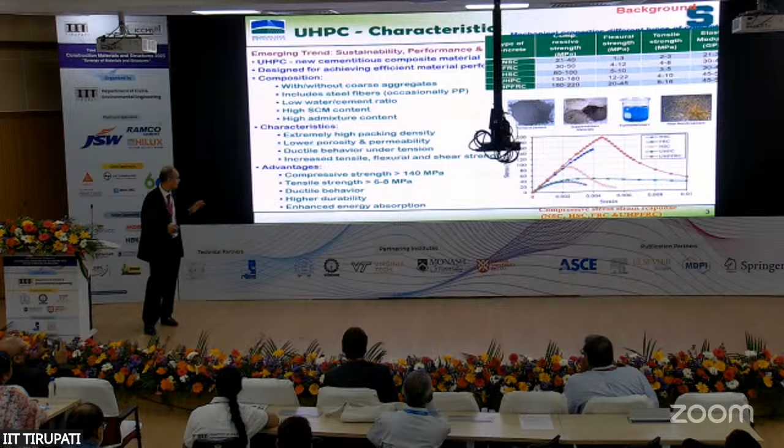A lot of advantages. It's not just the strength, but there are durability considerations. It's one of the best. It has been used for the last 20, 30 years in real applications, bridges, buildings, first started mostly in Japan, Korea, then moved to Europe as well. Then it moved most recently to the US, in fact, right? And Canada was much before that. We had a lot of projects which you can see on the internet if you want.

Now, when you use this material structurally, you have a lot of advantages. High flexural capacity, increased shear capacity, the cross section will be much less, and even maintenance costs will be less because no corrosion and other issues. But when it comes to problems, brittleness you can overcome with fibers. Another problem can be fire, and fire is very important.

Why? Because if you look at the magnitude of the fire problem, you will see how important. Fires cause thousands of deaths and billions of dollars of damage in each and every country around the world. Remember, earthquake may not be a problem somewhere else, but still we do so much for earthquake design only in some regions. But fire, it's not like this. A small village to a town to a city, it's a problem.

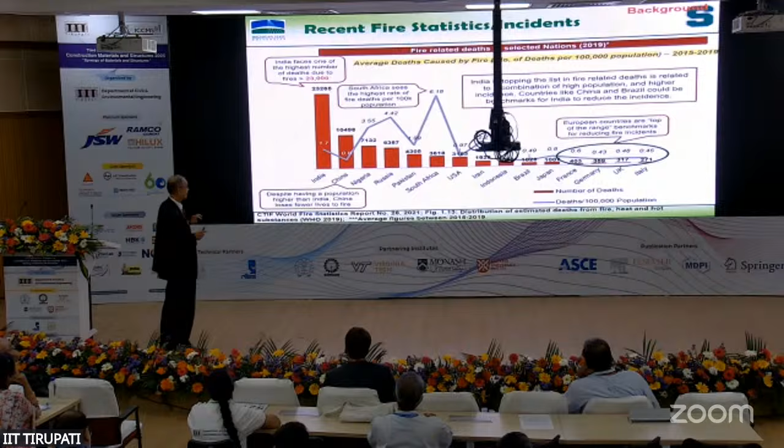It's really happening. The Los Angeles wildfires are an eye-opener for the US. In fact, NSF immediately opened up big fire grants because of that. So far, they were resisting funding fire, right? Because the government realized that the damage is too much. 12,000 houses, or structures, for example, were incinerated in that region, right? And the same thing happened a year before in the Hawaii wildfires, right? So it keeps on going.

These wildfires are a new phenomenon, but okay, let me first talk about India. In India as well, a number of fires are happening. Almost weekly, you have a major fire happening. Yesterday or the day before, in Delhi, a chemical factory fire, I think it was on the news. Now, in Hyderabad, for example, the Charminar fire, a very significant number of people died, 17 dead. Just before that, the Kolkata hotel fire.

And in some parts of India, we are trying to do a project with a professor from IIT Bhubaneswar. So in this, hospital fires are becoming very predominant in India a number of times, right? So these fire problems, depending on the region, involve a lot of societal conditions, or societal levels. It causes a lot of things, okay?

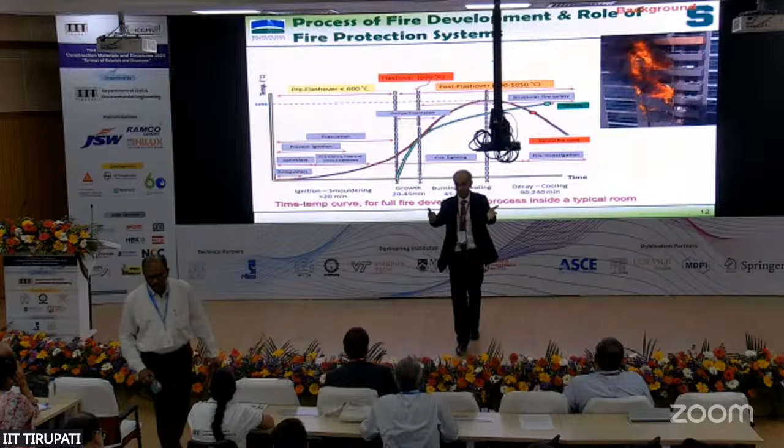This is how a typical fire grows in a building. You can see an ignition happens, the fire significantly grows, then it becomes exponential, this red line. And then after a certain time, either the fuel runs out or the oxygen runs out, so then it cools down. So first of all, we design for this fire, the green line. All building codes design for a certain kind of time-temperature curve, which was applicable in 1919. Not 1990. For 100 years, we are struggling to change it.

I was in a lot of committees. Oh my God, I think it's easier to pass a bill in the parliament or the US Congress than in the code committees. Believe me, you might think it's easy to get an approval. Still they changed almost, and they came back to the same thing. So there is so much lobby. Now, when this fire grows, the curve we use is the green line. You might say that it doesn't capture the faster rise in temperature. That's what the problem is.

The second thing, as soon as this fire happens, we keep handheld extinguishers in the US. You can fight the fire yourself. If not, sprinklers have to come in. After that, smoke detectors have to come in. After that, you need compartmentation. That's when the structure really sees the pinching effect of the fire. First, the walls, floors, columns and beams will see the effect. So these are passive fire protection systems. They don't need any sensors. Active systems, all this needs sensors, and evacuation happens here. And firefighters have to come in here to have a better chance.

I mean, they can come anytime. If they want to fight the fire, the smaller it is, the easier it is. When the fire is in one room, no big deal. It's a piece of cake. 2 rooms, no problem. But if half the floor spreads, a little bit of danger. Whole floor spreads, much more danger. If it is 2 floors, before, firefighters used to break the walls and enter the building. We say there are 2 things for fire safety, pre-9/11 and post-9/11. Pre-9/11, they would jump to save a cat, a dog, or anything. If your purse is left and you tell the firefighter, he will go and get it. But now, they will try to move away, I tell them not to go into this building. This is a problem from a life safety point of view. Big problem.

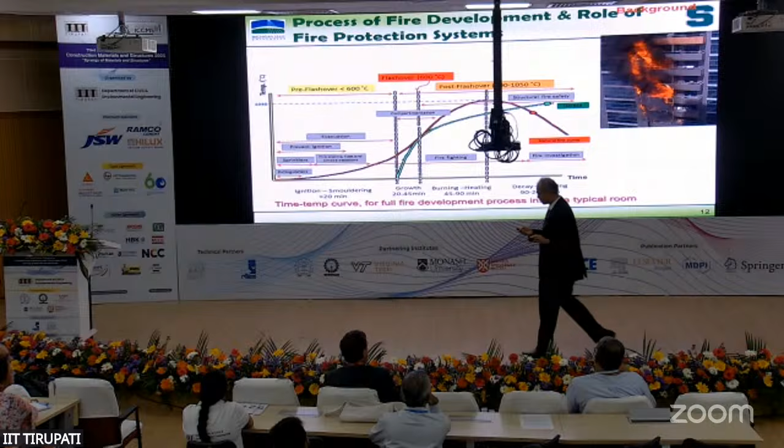Now, fire is a major requirement. How do we do it? When it comes to structural systems, concrete structures, one thing I want you to know, when I talk about UHPC, I don't want to upset my colleagues who are sitting here. They're all UHPC or concrete experts. This is for concrete. I can say the same thing for new steels. I can say much worse things about wood, FRP. The newer the material, my philosophy is the worse the fire performance. You need to engineer it. You cannot use 1919 methods or 1960s rules for that.

So if you see here, what do we put in? The only things we do are rebars, cover thickness, and the minimum dimension of a column or a beam. That's all current codes do in India, abroad, everywhere. And what was the difference? I will show you.

Older structures which were built in the 60s, 70s, 80s had huge mass. Now you are trying to slim down. Everyone wants to be a model, including our beams and columns. We want to design these shapes. So when you do this, do you think the performance is good? No, the performance won't be that good.

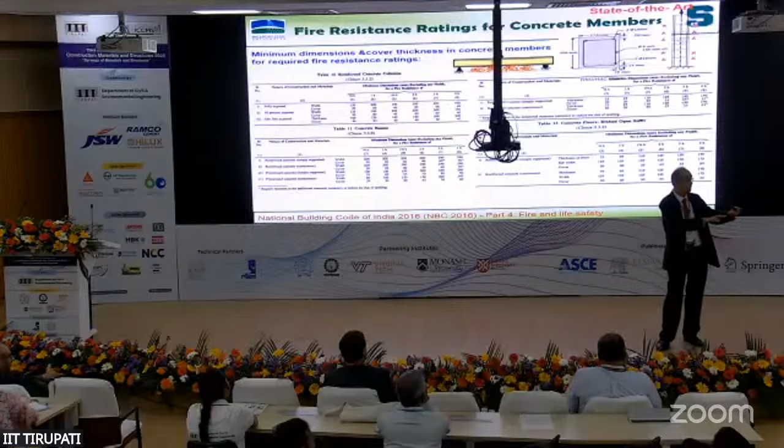So this is the Indian code. I mean, not very different from other codes. And how was this code developed? It was basically developed based on one test done somewhere around 1960. Still, this is how fire ratings are developed. One test on a structural element, they go to the lab. It's not even done in a university. There is no third party review.

So they submit it and they get a rating. For example, for a concrete beam, if you need a 1 hour rating, you get the minimum dimension and cover thickness. That's it. Now, this is not good because our modern practices are different, lifestyles are different, our modern structures are different, our modern materials are different. They were okay for the 1960s, but much of this is taken from there.

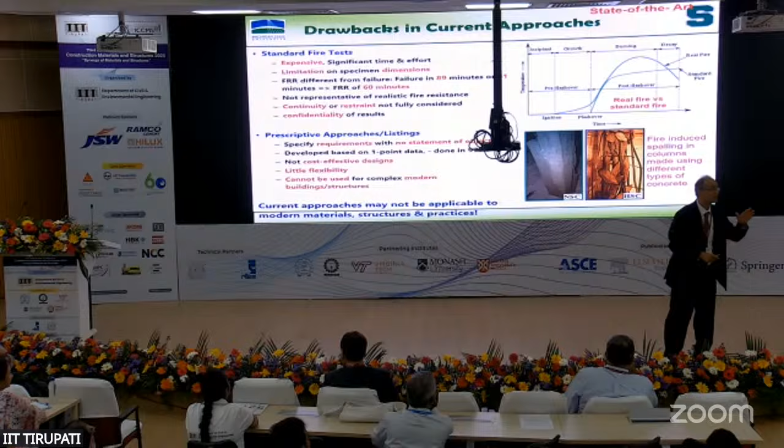Now, if you see here, for example, the fire curve I already explained to you. If you have electric vehicles, in the US every house now has electric charging in their basement. If a basement fire starts, an electric fire is entirely different. Some of these batteries release oxygen, so it fuels the fire. Our bridge fire is different too. So from this point of view, you cannot apply it, and it doesn't account for the load or the restraint effects. Forget about it. We try to do so much detailing for creep and such, but when the fire happens, we don't account for any of this.

Now, modern buildings are taller, wider, and too many of them are coming up all around India right now, for example. And the second thing is our architecture is different. Older architecture had a big wall with a small window in it. Now, everywhere it's completely glazing. And that glazing goes away at 600 degrees centigrade when the fire reaches it, as you saw in that curve. So oxygen enters and fuels the fire. Why do we need glazing? Because everyone is interested in the outside view rather than the inside of the room, in their offices.

In fact, that's the most competition. When we hire faculty, if they get the office with a view, that's the benefit they get. So it's unfortunate. And the fuel inside the room is much worse.

My daughter must be shopping for her 51st dress. And we call ourselves sustainable. She teaches me sustainability. I grew up with one or two shorts maybe in India. If there was no rain, if there was no sun, next day I had to wear wet clothes, in the rural village of Kodur. But today, it's just press the button and the dress is here. I said, why are you buying this? Oh, daddy, it's on sale. Right? It's on sale.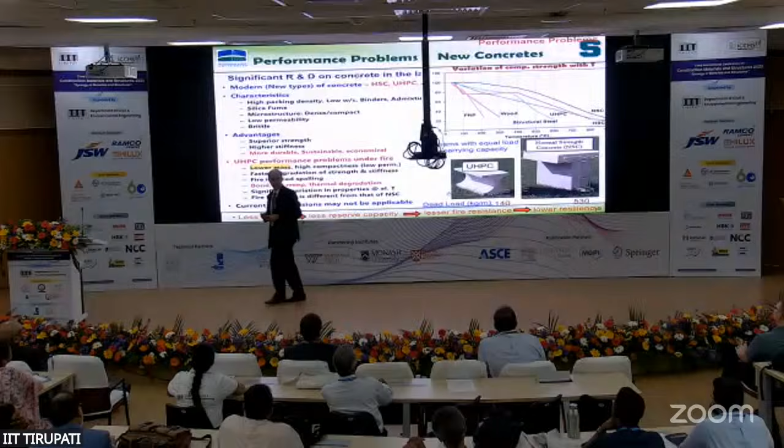Then, when it comes to materials, significant levels of R&D are happening. New materials: steel, concrete, wood. I already told you why we are using them. Two problems. One is faster degradation of strength with temperature. You can see in those curves, percentage of strength versus temperature. The higher the temperature, you see that you have normal strength versus high strength versus UHPC. Just focus on that, okay? And we established that recently. And thermal mass is less, you know that. And these concretes always have water, I mean, maybe a reduced amount of water.

What happens? A conventional column, a normal strength concrete column, can you see here? After 3 hours, nothing happens. High strength concrete, I almost call it UHPC. It's 140 megapascals, doesn't have steel fibers or anything. 140 megapascals concrete, tests were done for the Portland Cement Association. So water becomes steam. Here your permeability is 10 to the power of minus 16. It's about 10 to the power of minus 18 or even up to 19. It's hard to measure those times.

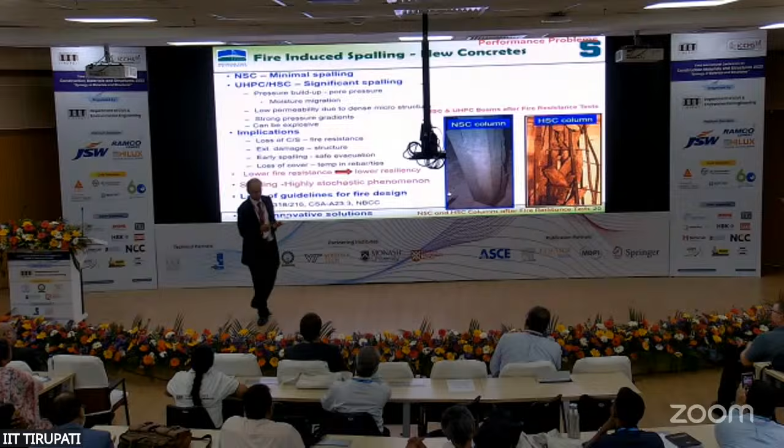So that steam converts itself into pressure, tensile stress. In fact, if you increase the compressive strength, but not the tensile strength very much, when the tensile stress exceeds the tensile strength, which is dropping with temperature, boom, boom, boom, popcorn, right? So that's what happens. And it comes out as bullets. That's UHPC beams. You can see on the top, okay? Conventional normal strength, 3 hours. After about 76 minutes, UHPC, okay?

So now, what research can be done? Due to lack of time, I will quickly go through a few slides. Now, we have done a lot of work. For the last 30 years, my work has always been on fire, right? So we tested a lot of beams, columns, slabs, walls, you name it: steel, concrete, any composite, wood, FRP. We tested various types of concrete, did a lot of material property tests at elevated temperature, about a dozen properties you need if you want to model it, not just your strength, stiffness, or elastic modulus, okay? Tensile strength is very important, which we neglect, if you want to have a better fire resistance of concrete. Then we developed some models and guidelines.

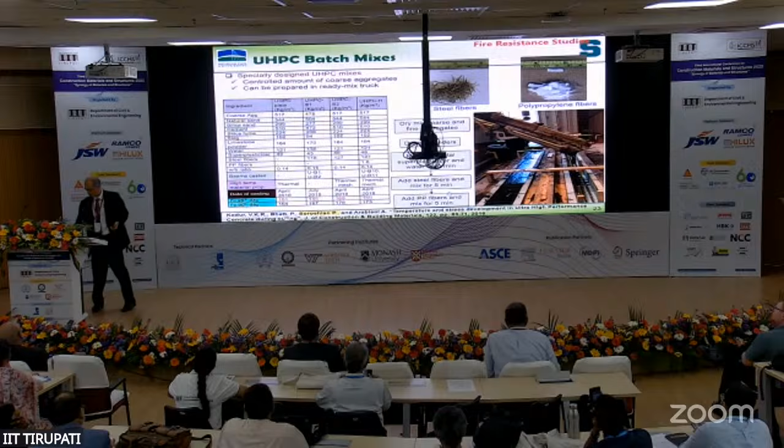So these are some of the mixes. I don't want to go through this. I worked with Professor Soroushian, some of you might know, to develop this UHPC mix, okay? So these are different beams done for the Air Force in the United States as part of an Air Force project. And we developed thermal properties. This is how thermal conductivity changes with temperature. So this is UHPC, this is high strength concrete, this is normal strength concrete. It's not much, but the thermal conductivity of UHPC, if you add steel and polypropylene fibers, you can modify to some extent, but very similar thermal properties, slightly worse in UHPC, or higher thermal conductivity,

similarly specific heat. When it comes to compression stress strain curves, you can see this at room temperature, 200 degrees, 400, 600, 800, 1000 degrees centigrade, but the rate of heating is different. So that's why when it comes to guidelines, if you are using UHPC in an office building, it's okay. But if you are using it in a parking garage where cars can catch fire, if you are using it in a bridge, if you are using it in a tunnel, you have to do something. I mean, it's dangerous.

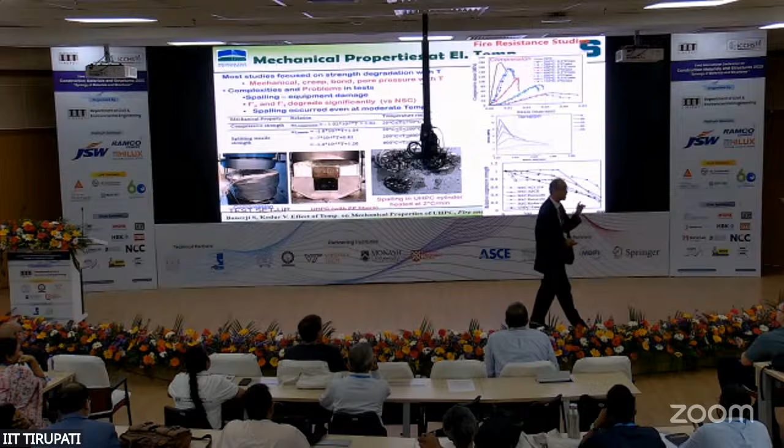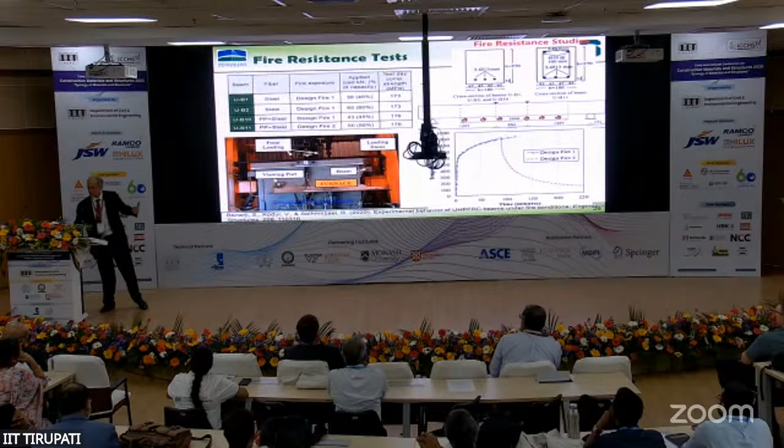So this is tensile strength as a function of temperature, similarly. So we established, and that's the comparison for normal strength concrete, high strength concrete, and UHPC here, high strength here, normal strength here. Okay, so these relations are very important. We followed it with a number of tests again for structural members, columns, beams, and all this. I'm going to just show you when these columns were made, the temperatures.

For example, one of the thermal responses of this, the corner rebar. In fact, in a concrete member, less effect on concrete. It's all how steel is structured, positioned from the fire point of view. When you have this, right? So you look at this, that corner rebar, it sees much more rapid rise in temperature than the middle rebars, okay? And this is the deflections of the beam. As you can see, if you add polypropylene fibers, it helps to some extent, the deflections, which I'm going to talk about. Then we did the tests, as you can see, right?

This is normal strength concrete beam, high strength concrete beam, UHPC beam with steel fibers alone. If you add polypropylene fibers, they melt early at 160 degrees, create channels. Basically, it increases the permeability. Think of it that way. And the pore pressure gets alleviated. So you have lesser spalling, much lesser spalling. And they fail, as you see, normal strength concrete beam, it fails in 180 minutes. High strength concrete beam, UHPC, and look at the percentage of volumetric spalling. When you add fibers, you can reduce it, but not fully.

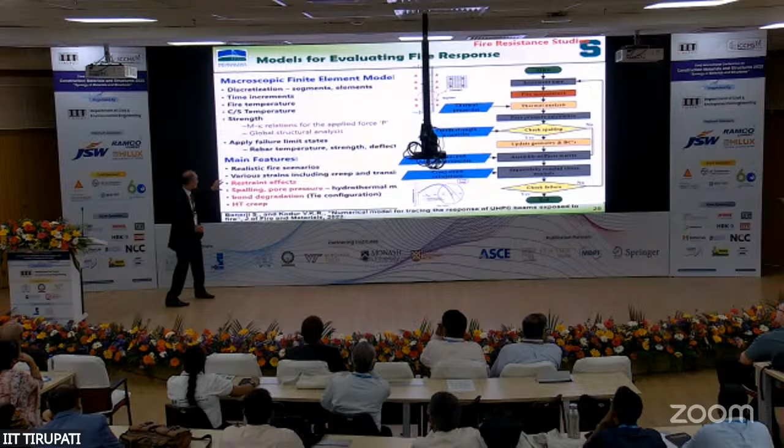We developed models. Lot of macroscopic, we developed our own models starting from Fortran code. And now ChatGPT is helping us well with all this coding, whatever. But the main thing is we accounted for some of the key parameters. And as you can see in these models, to model how long the column or a beam can survive in a particular fire. That's the idea, right? And we use the material properties we developed. And if you see this, good validation is required.

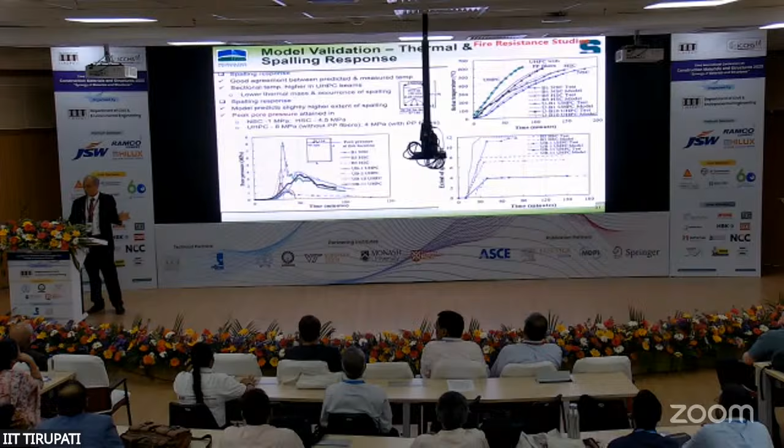UHPC, you can see the faster rise in temperatures. Normal strength concrete beam, slower rise in temperature. It helps the rebars to contribute to the tension stress. So normal strength concrete beam on the left-hand side, it's the deflection. Here normal strength, high strength, UHPC with only steel fibers. But if you add, it's the opposite. UHPC with steel fibers, if you add polypropylene fibers, you can increase the fire resistance.

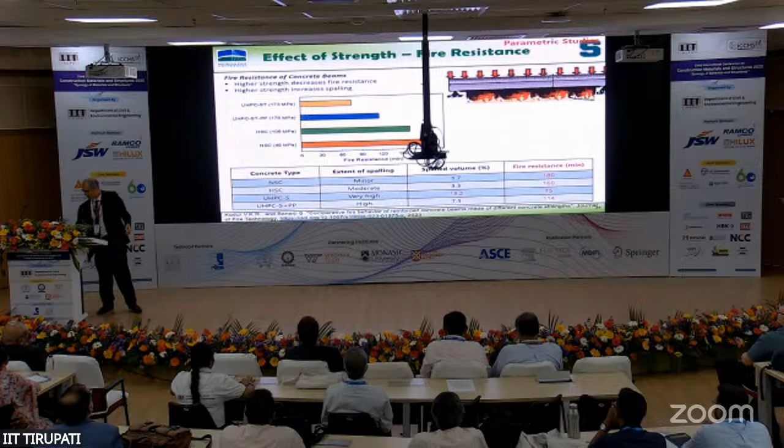Okay, so basically, then we varied a lot of factors, which is very important. It's not just the cover thickness and the size as the codes say. So you can quickly glance through this. Basically, I already explained to you, conventional concrete 48 megapascals, high strength concrete, okay, how long it takes for it to fail, right? And how much spalling happens. If you add polypropylene fibers, you can reduce, increase, normal strength concrete beam, it's opposite. Yeah, very less spalling, more, right? So the extent of spalling.

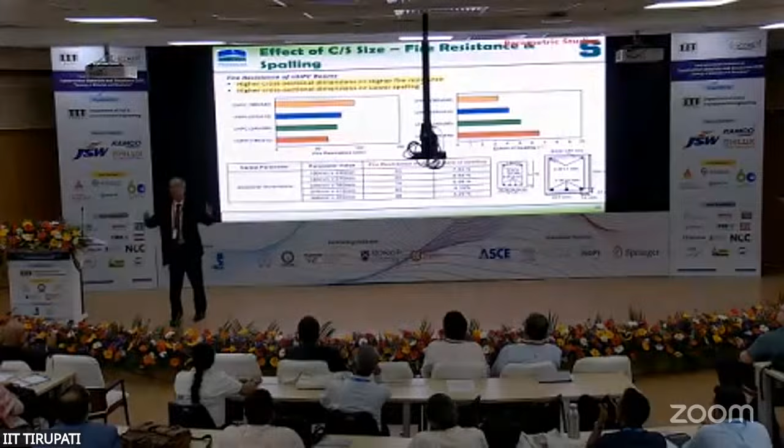Now, basically, effect of cross section, the bigger the cross section, you get higher fire rating because more thermal mass is there. And so it helps to achieve higher fire resistance. And if you use it in bridge girders and stuff, a recent project has been with the Prestressed Concrete Institute, these slender stems are a big problem. Any spalling there, it can happen. It will be just like steel. Okay, when it spalls off in that one, it does.

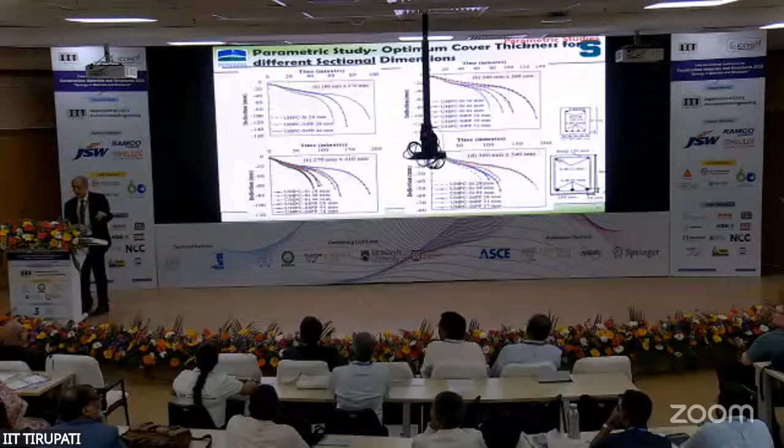In columns, if it happens, you tend to get biaxial bending. You design this column, axially loaded column, at 15 minutes, you have some spalling because of the huge fire increase in temperature, then you have to include it, but currently we don't do that, right? So this is some of the I-shaped columns, rectangular sections, less of a problem than I-shaped sections. And effect of fire scenarios, for example, severe the fire, rate of heating, hydrocarbon fires are much worse if a tanker hits a bridge, right? And then you can see cover thickness.

By increasing the cover thickness, you can optimize it, but you don't have much room in a UHPC member. In normal strength concrete member, maybe you have a little bit of room. You are losing the entire purpose of using UHPC because your section sizes are limited.

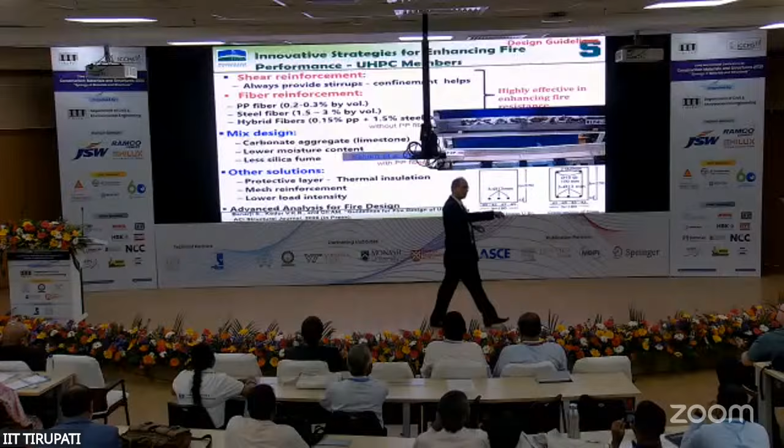So with cover thickness, more cover thickness is better, only to some extent. So what did we do? We developed some innovative strategies. First and foremost, one of the project objectives of this one with the US Air Force is to remove the shear reinforcement in UHPC, which structurally we have done a lot of work on, and which you can do because of the higher tensile strength and steel fibers. But not for fire. If you are doing this for fire purposes, confinement is better. You need confinement, it helps.

Fiber reinforcement, how much to add? Polypropylene fibers, always throw in those fibers. It's not expensive. Talk to material experts. They will tell you workability becomes a problem, but they can come around it. It always helps, especially with cracking and other things. And if you are using it in bridges and tunnels, a combination of steel and polypropylene is much more beneficial than using steel alone or even polypropylene alone.

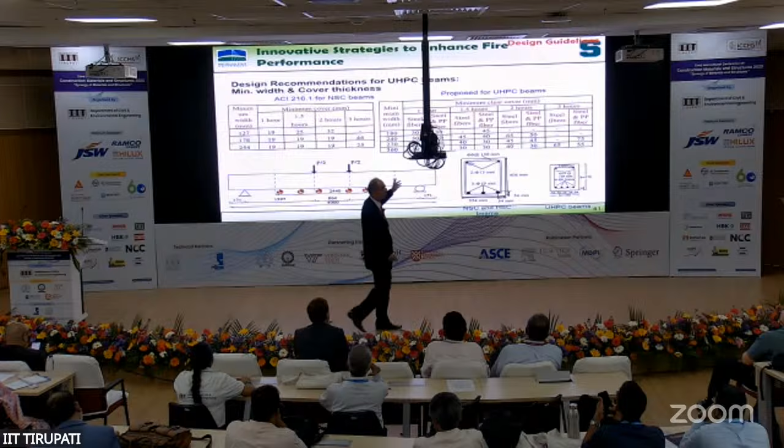Then you can do some of these things if you have an option. But Eurocodes and others recommend putting a protective layer. That works, but it increases the sectional dimensions, and there are durability and a lot of other issues. So a protective layer and mesh reinforcement can help. And in fact, this paper is going to be published soon, with some design recommendations on how much cover thickness you need.

That's not an option a lot of times because of optimized design. If you do this, what are the minimum dimensions for a beam like this, and what's the cover thickness? Some of the recommendations cover both cases, whether you have steel fibers alone or polypropylene fibers also, in combination. So in summary, UHPC is an effective material to address sustainability, durability, and other things. But I cannot say the same for fire unless you engineer the system, because using current code provisions won't help.

Second thing, it's not just UHPC. Remember, for those of you who have not seen other presentations, for any material, if you change the microstructure with fly ash, GGBS, and all this, fire becomes a problem. I have a lot of data to show that. Structures made of UHPC exhibit lower fire resistance, especially due to quicker loss of strength and spalling. And you need to innovate. Through experiments and calculation methods, you can develop innovative techniques, even if you are using it in columns, such as bending the ties or providing proper stirrups. In fact, the closer the stirrups, the more you can eliminate half of the problem. If you can increase the stirrup content, the proposed design recommendations can be used.